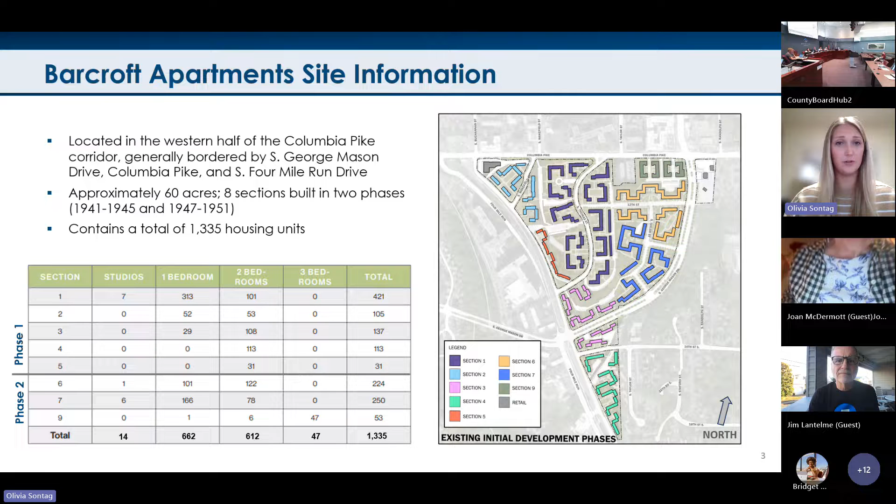So in 2021, Barcroft Apartments, the property was listed for sale and it risked the displacement of many residents. So with a loan from Arlington County and Amazon to Jair Lynch, they were able to acquire the property, and the affordability of those 1,335 units was preserved for 99 years, up to 60% AMI. No residents were displaced as a result of this acquisition.

Additionally, rents were frozen in 2022 for residents living at the property, and annual increases, which started in 2023, are capped at 3%, up to a maximum of 60% AMI. And then also as of December 2023, Jair Lynch and the county have agreed to meet some deeper affordability needs by committing to deliver at least 10% of those units as affordable to households earning up to 30% AMI.

So we had 2 primary objectives for this land use process following the December 2023 approval of the financing plan. The first was to build upon and update the vision of the Neighborhoods Area Plan from 2012, as well as the Columbia Pike Revitalization Plan, adopted in 2005. The goal of this is to support both the financing plan, but also incorporate some additional site analysis and information that's been provided by Jair Lynch over the past couple years.

And then a second objective of this process was to explore some existing and new tools to ensure the updated vision and commitments are clearly documented and can be successfully implemented as part of a phased strategy for this large site.

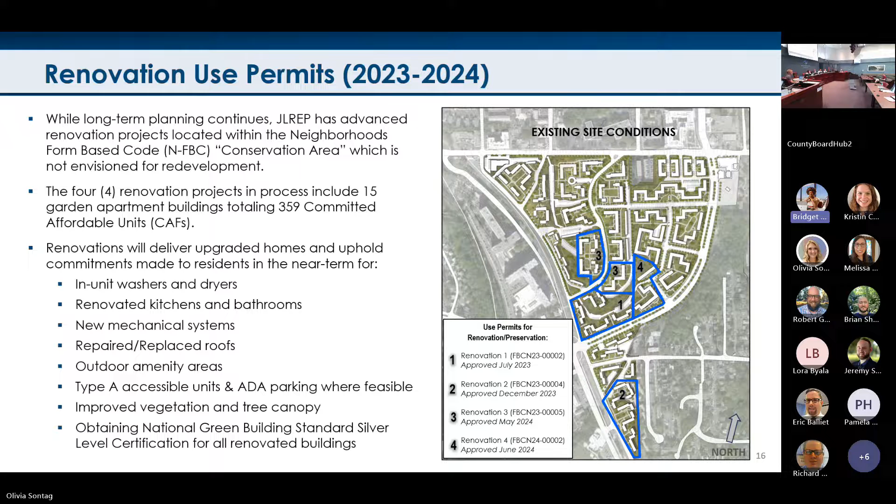Turning to the working group process we've been on over the past several months, Ms. Sontag gave a good outline of those various meetings starting at the beginning of this year. Our team has been quite pleased with that process. We've really enjoyed the dialogue and feedback we've gotten, and we feel we've been responsive to the working group's concerns and feedback, and that this plan reflects that vision.

So I'll go through relatively quickly some of the key elements of the redevelopment plan. This slide is meant to show what's informing the location of the redevelopment sites.

One main consideration is of course topography. If you've all been out to Barcroft, you'll note it's quite steep and hilly in some areas, especially on the southern end. That's a factor in determining where to locate redevelopment.

But the chief influence here is the neighborhood's form-based code conservation area. That area highlighted in yellow color in the center is the area intended for buildings to be preserved historically, as well as from a housing affordability perspective.

We've made a couple of changes to the existing form-based code recommendations. Those purple hatched areas to the left of South Thomas Street are areas where we're adding back in buildings that we think should be preserved to keep that historic Barcroft gateway intact.

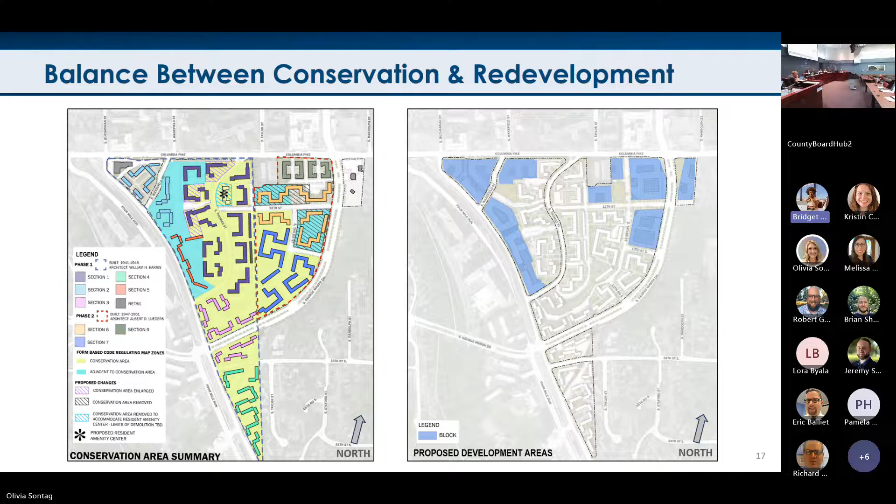You have the next slide. Here I'll hand it off to Mr. Pinkoski to walk you through some of the key elements of our transportation plan.

Internal to Barcroft, the MTP calls for 12th Road to be a bikeway, but we are going to be enhancing that through this process. West of Thomas Street, there is a trail connection proposed on a future road. What we've been able to do is work with staff to really create that east-west connection similar to the road grid, providing enhanced facilities along 12th Street and Wakefield, and a connection from Wakefield to the W&OD trail along Four Mile Run Drive, which was not currently contemplated in the MTP.

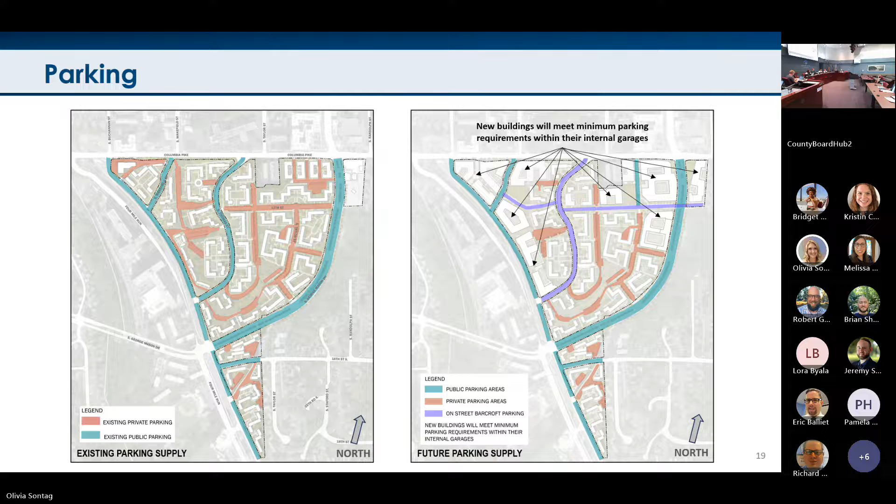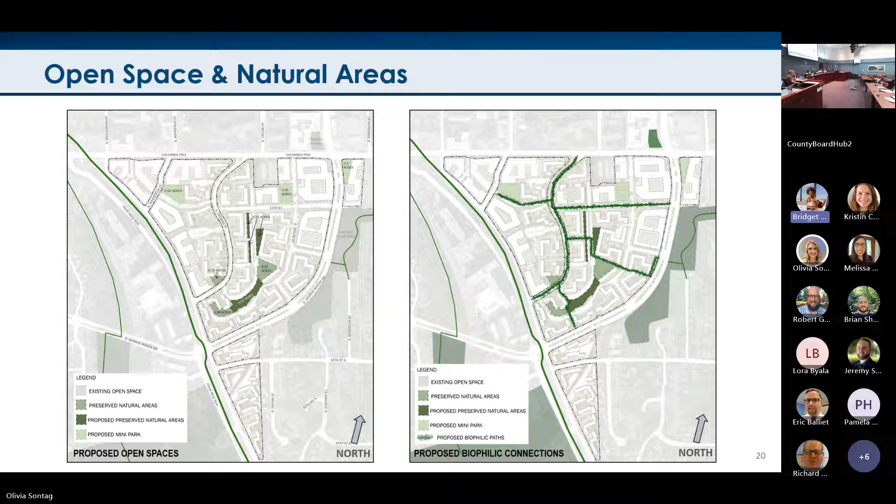On the right-hand side, you'll see our proposed biophilic path network. This will be pedestrian focused, where we're enhancing existing and proposed connections by providing additional plantings, understory trees, shrubbery, lighting, signage, and opportunities for benches and places to pause as you walk throughout Barcroft, to provide a unique connection for pedestrians and contribute to the placemaking we're trying to do here in Barcroft.

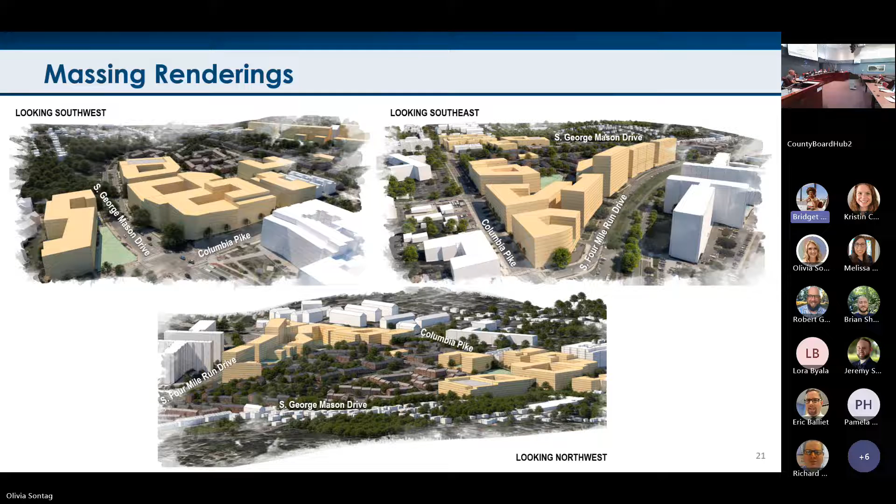Here's some illustrative massing renderings. We know it's quite difficult sometimes to imagine what the plan might look like with these 2D exhibits, so this is a very rough, high-level overview of what Barcroft might look like with the proposed vision implemented. With that, I'll hand it back to Mr. Matuzik, and our team is available for any questions afterward.

Thank you, Lauren. Good evening, everyone. Matt Matuzik with the Planning Division. I just wanted to walk you through several of the policy-related items we have, and explain how the process over the last few months involved a number of very specific plans that have been developed, particularly for the Columbia Pike corridor, including the Barcroft property.

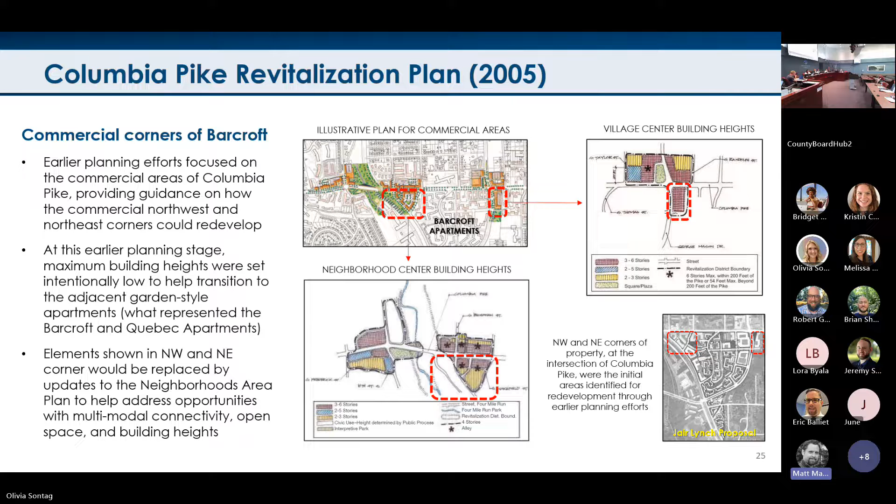So as we look at that neighborhoods area plan, this is the one we did in 2012, focusing on Columbia Pike's residential areas. Here's where we not only bring in those commercial corners, shown here in white because they don't have that same guidance in the adopted vision, but we will complete that entire block and also return to the previous vision of what type of land use we're expecting, the maximum building heights, and the other elements that became the building blocks for our form-based code zoning tool, speaking to the transportation network and the open space network. So primarily map changes, but with some additional narrative to explain this year's land use process.

So just zooming in a little bit further, you can see on the next slide that one of those elements really begins to address...

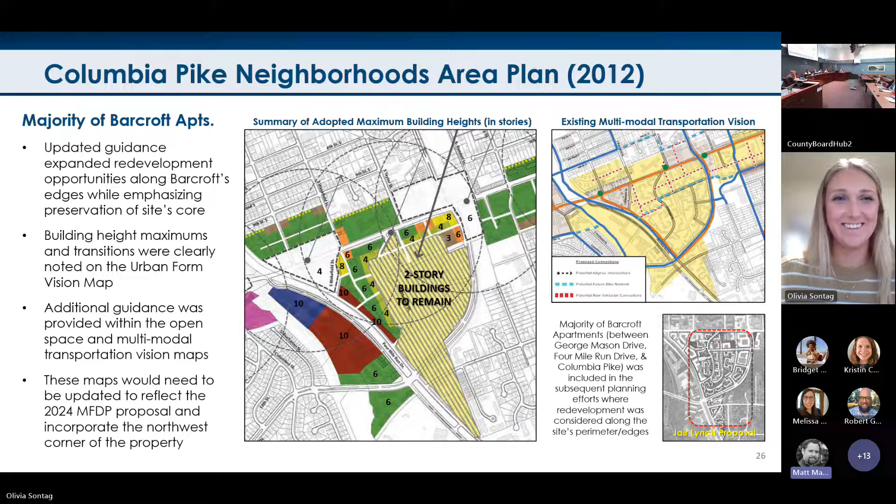And Matt, I think Kristen's going to jump in here for the next couple of slides, if that's okay. Sure, we'll give you a break. Thank you.

So one of the things we recognize is that both the neighborhoods plan and subsequent planning documents in the MTP no longer reflect the vision we now have for Barcroft. On these maps you can see the changes happening with the network. Jair Lynch didn't really speak to it, but there was a by-right development that happened just off of Columbia Pike that makes the 11th Street connection we had anticipated—being that east-west spine for Barcroft—no longer implementable.

So we've recognized that 12th really does need to do that east-west connectivity. You can see that highlighted in the blue dash here. We've also recognized that Wakefield needs better bike connectivity to connect everyone along the Columbia Pike corridor parallel to 12th, all the way down to 4 Mile Run, across South 4 Mile Run Minor.

And we want to make sure those are safe. All of the bike facilities identified will be designed based on the guidance in Appendix C of the bike element, so that they provide safe and comfortable facilities for our users. So this is how you can see the network has evolved.

If you want to move on to the next few slides, we'll see how that's reflected in the maps. So on this map, you can see that a number of planned connections are no longer going to be part of the vision for Barcroft moving forward. We're just making sure the MTP guidance is something that's usable for us moving forward.

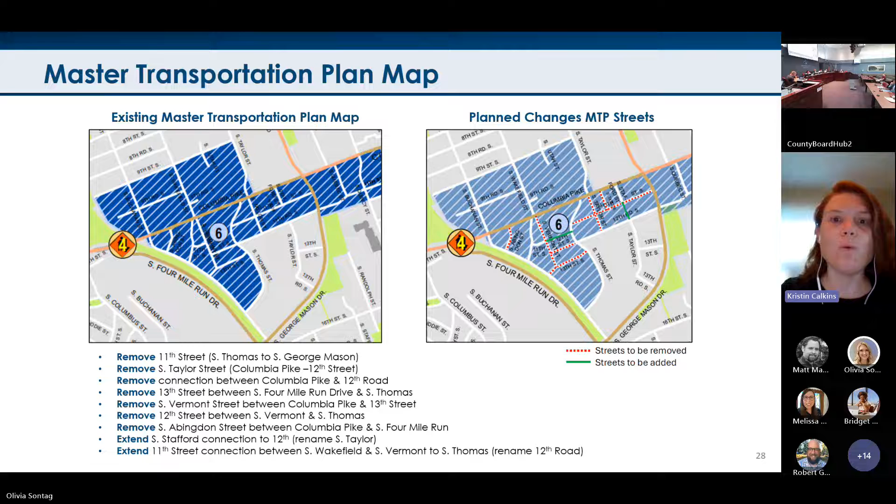12th will become elevated. In the original plan, it was envisioned much more as a bike boulevard. Now we know it's going to have to accommodate a lot of modes and be a true multimodal street. And where we've lost one South Taylor connection because of the construction of that townhouse development, we've created a new South Taylor connection between 12th and 11th to make sure we have a bit more circulation capacity within Barcroft.

So we've changed it from an on-street route to a planned bike facility as part of this change. We've also recognized that we really need to catch the grade from South Thomas to South Wakefield, and that the connection we'd planned before would be difficult for a lot of users. So we're going to continue the 12th bike facility to South Wakefield and create some sort of safe, comfortable facility on South 4 Mile Run Drive to connect to the W&OD.

And that, I believe, ends the transportation slides. All right, thank you, Kristen.

The other elements shown in the earlier slide also capture how some of those layers just discussed carry over into our general land use plan. Here's the existing and future street network in the white lines that would need to be updated. Right now we're looking at the existing GLUP map. In a second, we'll show you what the proposed looks like. But a number of other elements reflected here also need to be reconciled.

What this map is capturing is really the relationship between those two planning areas, the commercial one from the early 2000s and the neighborhoods one from the 2010s. So the commercial area is identified by note number 8 on the GLUP, and you can see its dashed boundaries there. 24 is the later note identified with the neighborhoods area plan and its revitalization district. And 24A is simply an even more fine-grained boundary for the conservation area, so the limits of preservation versus redevelopment.

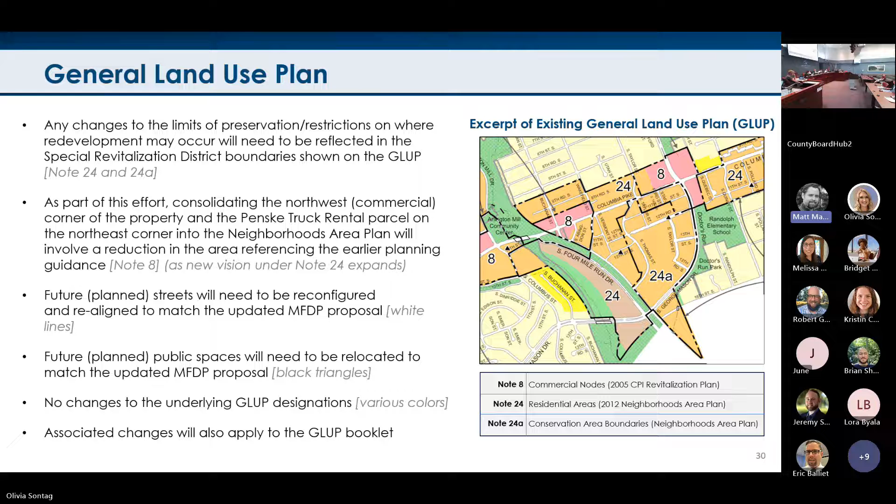In the next slide, you can see how that information has been updated. The boundaries for note number 8 have been reduced. We now have 3 black triangles because we've gained an extra park at George Mason, and the different line weights have been adjusted to reflect what you're seeing in the other maps, including the MTP.

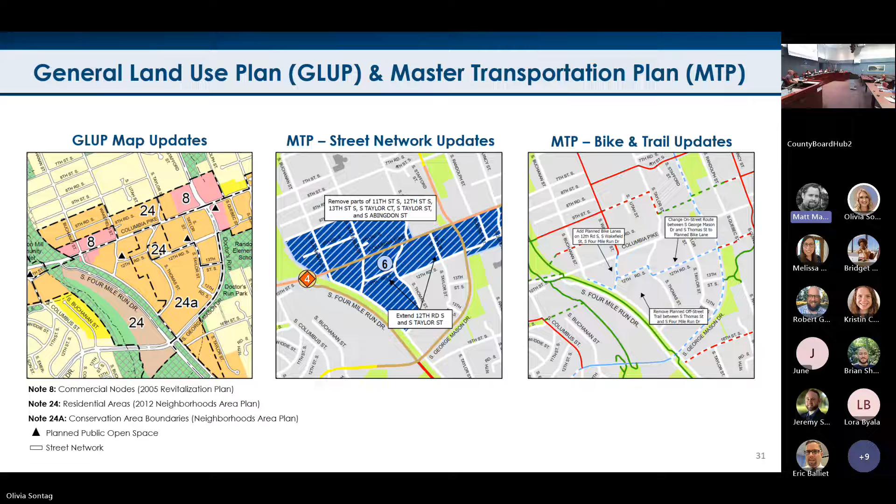We are also going to use this opportunity to update the GLUP booklet, which is kind of a companion document. We try to update it once or twice a year. And here, I think some additional narrative about this year's process and where we are ending up will be reflected as well, to make sure that no matter where you go, you can see this information pretty clearly.

All right, and then the next and final section we wanted to cover is really what's still ahead of us, which unfortunately is a lot of work, but it really involves a more detailed dive into the concepts we just finished discussing. So now that we have a general sense of where the parks and streets are going to be, we now have to figure out their character, their cross sections, and the relationship with the buildings, and ultimately get down to the level of detail that already exists in each of the form-based codes.

So creating and establishing build-to lines and making sure that we have enough detail available so that when these new construction applications come in, we can review them against this new guidance. This is something we're anticipating to complete in the fall and come back for further review in the later part of this year and through the winter.

And as we do that, at that point we'll be finalizing the GLUP and MTP changes that we just talked about. They are only being advertised in July. And at that point, we also anticipate probably being ready to consider the first new construction use permit for the property, which would be slightly different from the 4 renovation use permits we've looked at to date.

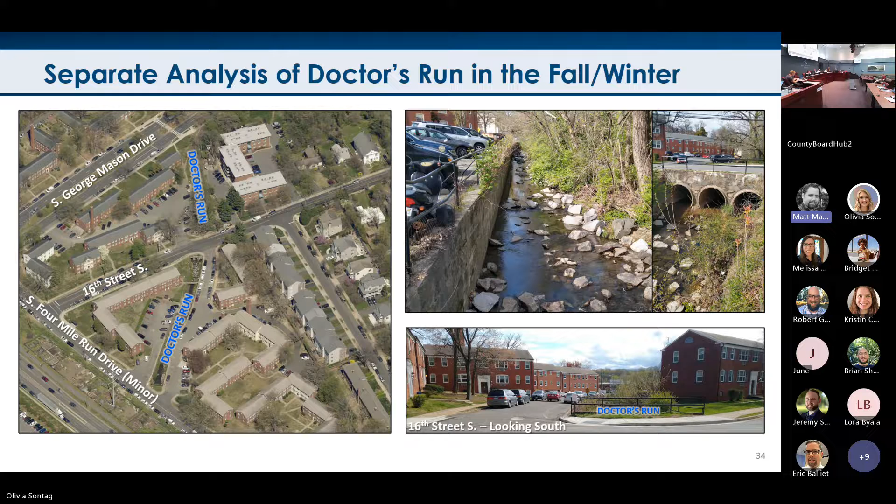One thing that's not emphasized enough on this slide is another piece of work that will occupy a good chunk of the rest of this year, and that is our ongoing analysis of Doctor's Run. This is the stream located along George Mason Drive, but it particularly begins to cross through the southern portion of the property. Given how close the surface parking lots and existing units are to that stream, we really need to do a further examination of the modeling used to verify flood risk and mitigation opportunities, further study the sustainability of that area, and also look at some biophilic opportunities that might exist along the way.

So while we've been able to resolve a lot of vision elements through the first 6 months of the year, we do anticipate that this item will really warrant a separate study that also is going to happen in parallel with the other form-based code updates we identified earlier.

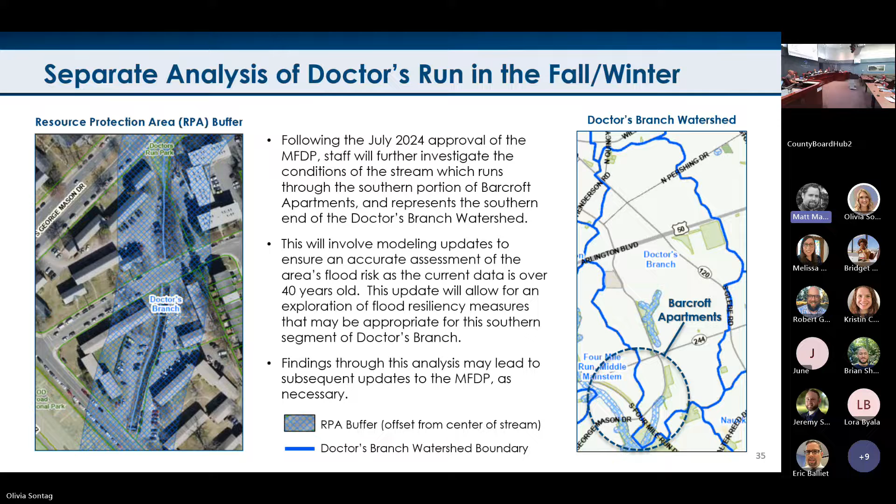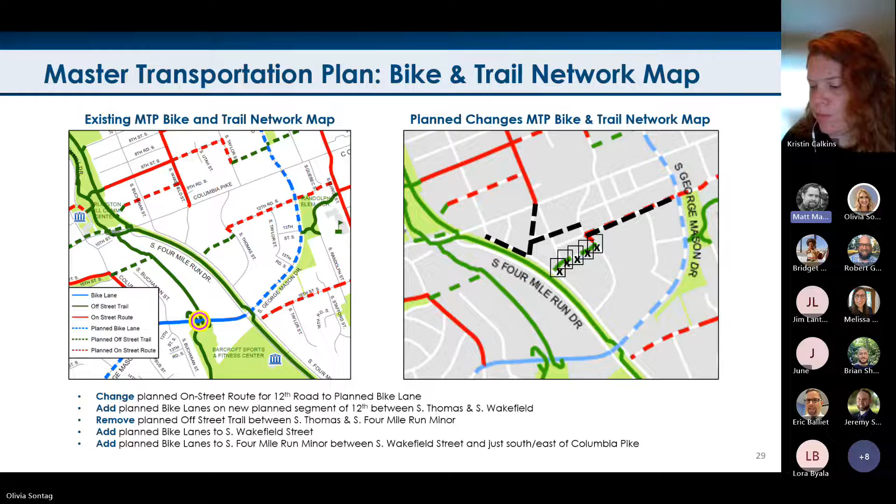Okay, it is. I can briefly speak to it in that most of those designations were identified as guidance for when future redevelopment would occur. Typically what we would do is wait for that opportunity to engage the owner in review of their potential redevelopment application, and consider exactly what the alignment looks like, the nature and cross section of that connection. So that's more of an expectation that private development would be involved in delivering.

Understood, thank you so much. And I think I know which apartment building that would involve—so that answered my question. Thank you.

I want to say I've been the TC rep for this land use process. It's been a great process—I really commend the Jair Lynch partners and all the staff. They've been doing a bang-up job on what's a really great opportunity, and a fantastic thing that our elected officials have done in saving a dramatic amount of affordable housing in Arlington on Columbia Pike. I'm pretty happy with where we've landed, except for one thing, which remains my main concern.

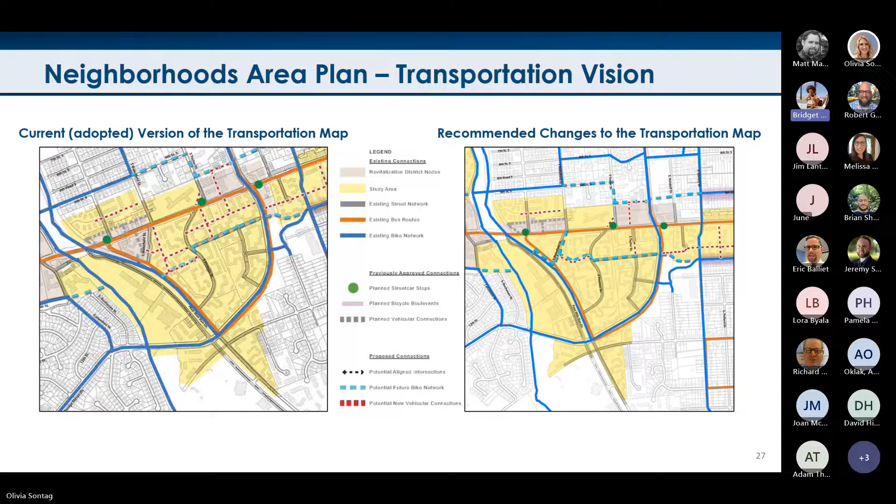That concern is 4 Mile Run Drive Minor. One of the big changes, in my opinion, of the Jair Lynch vision versus what was in the original form-based code vision, is there's a fair amount of new development planned for 4 Mile Run Drive Minor, all the way from Thomas up to Columbia Pike, whereas it used to be concentrated in that top left corner.

I like that we've added this bike facility of some sort on 4 Mile Run Drive Minor between Wakefield and wherever it can connect to the W&OD. I just feel like we need that facility for possibly the whole length of 4 Mile Run Drive Minor, or at least from Thomas all the way up to the W&OD or to Columbia Pike. Those are pretty sizable buildings that hopefully will hold a whole bunch of new neighbors.

I would really like those new neighbors to be able to get from their building safely to the W&OD. And while the W&OD is right there, it is unfortunately like 10 to 20 feet below where those buildings are going to be. The grade there is very steep, and it's hard to connect down there.

Ms. Calkins, can you talk at all about staff conversations about whether more bike facilities would be appropriate on 4 Mile Run Drive Minor to accommodate these buildings and the Barcroft development?

We have talked about this, to an extent, with Jair Lynch as well, because everything also comes out of their development site when we're asking for these connections. South 4 Mile Run Minor in front of their property will also be rebuilt.

One of the things staff has talked about is that there's going to be a wide sidewalk now, based on the form-based code, when cross sections are created in the next half of the year. That sidewalk will be wide enough for the handful of buildings that exist there, so people will be comfortably able to maneuver on those sidewalks if they're uncomfortable on South 4 Mile Run Minor, to make it to the more network-based facilities. We're really trying to focus on making sure that the network is served well.

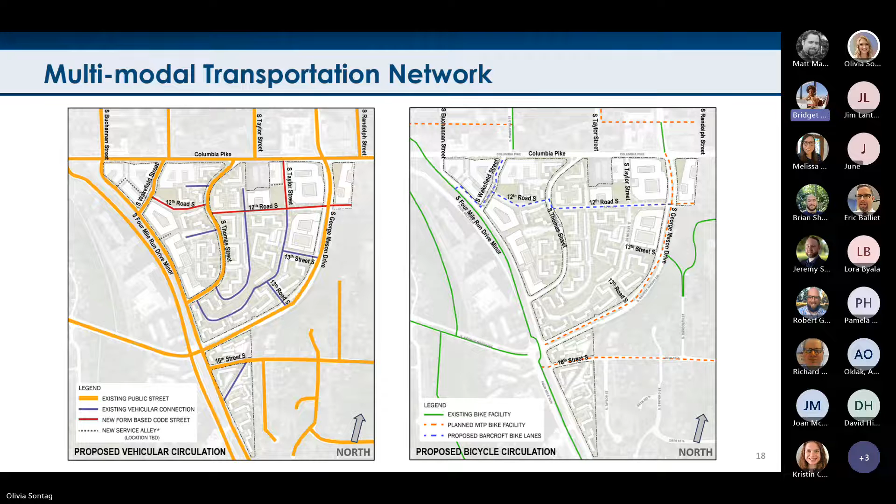All right, so just to be clear on the timeline, what's going before the board in July is what is here before us now, which is the MTP update, the financing and development plan update, and the very broad updates to the neighborhoods plan and the 2005 revitalization plan. Is that correct? Yeah, I think yes, that's correct.

Specifically - oh, sorry, go ahead Matt. I was going to ask to maybe bring up that last slide with the two primary actions that we wanted to emphasize. There we go.

It will be over the second half of the year that we'll get down into the detailed updates to the form-based code. Yes, second half of the year, we'll be looking at amendments to the form-based codes for those cross sections and other items. Fantastic, alright.

I look forward to talking about the cross section for 12th Road South, which I imagine we will be writing into the form-based code. Commissioner Flores, go ahead. A point of request: as we do that, if we could have maps of topography to gain visual understanding of how the hills affect the roads and transit, that would be incredibly helpful. We are all across Arlington pretty hilly, and this area in particular, I think it would be really helpful to get visualization on those hills as we look at maps like that.

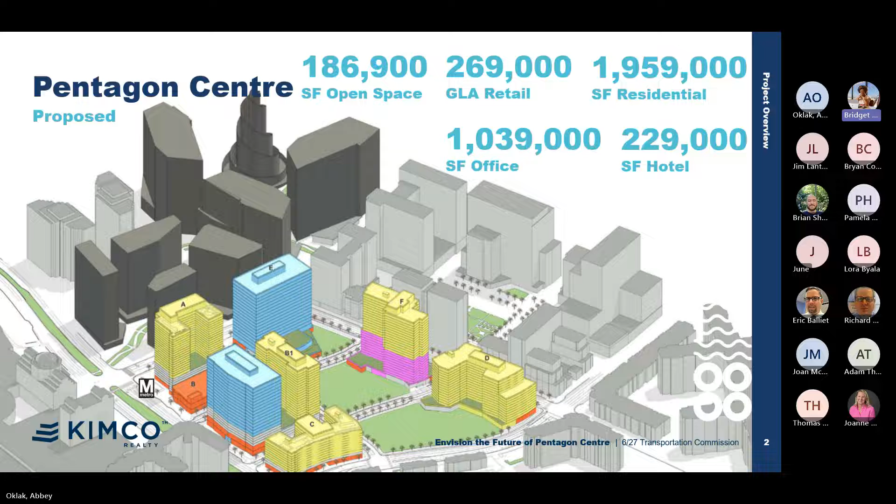From our original approvals and the updates in 2015, that was all pre-Amazon, which you can see in the upper right-hand corner, obviously with the helix in dark gray. So we're looking to match the density surrounding the site versus what's on the site today and what's currently approved. This is the big overall picture of everything we're proposing, with about a 30% increase in open space, and the increase in density and residential on the site is the majority of the increase.

Everything else is staying basically the same. However, the locations of the streets have changed to accommodate new block footprints, as well as to accommodate the phasing option to leave the Costco in phase one. So the north-south street, which we're calling Grant Street, moved to the west in order to allow Costco to stay in an interim phase one. So really the overall picture is relatively the same. However, we are adding the sector plan requirements to the right.

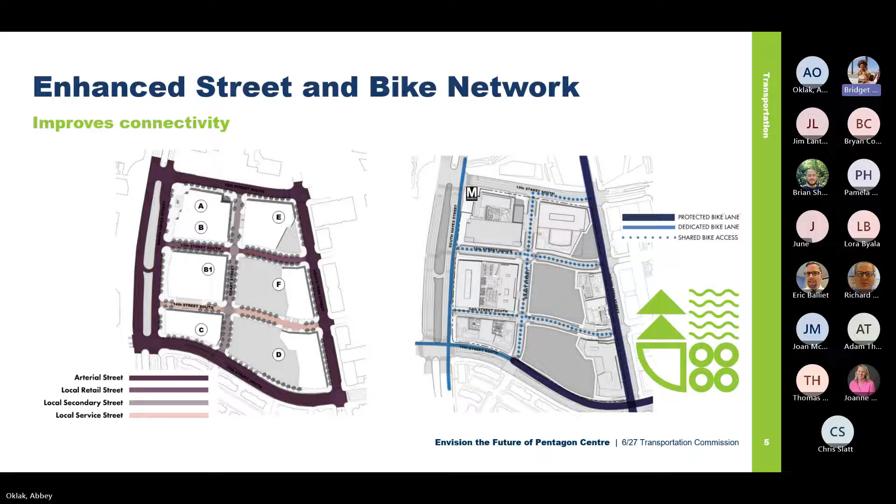Here's a little bit more detail. We are adding about one-third of a mile of new protected bike lanes, and we do anticipate slow traffic on the internal streets for shared connectivity throughout the site. Please note there is limited bike connectivity on 12th Street because 12th Street is the future bus BRT way, and there's a bus stop in that area, so there'll probably be limited activity that way.

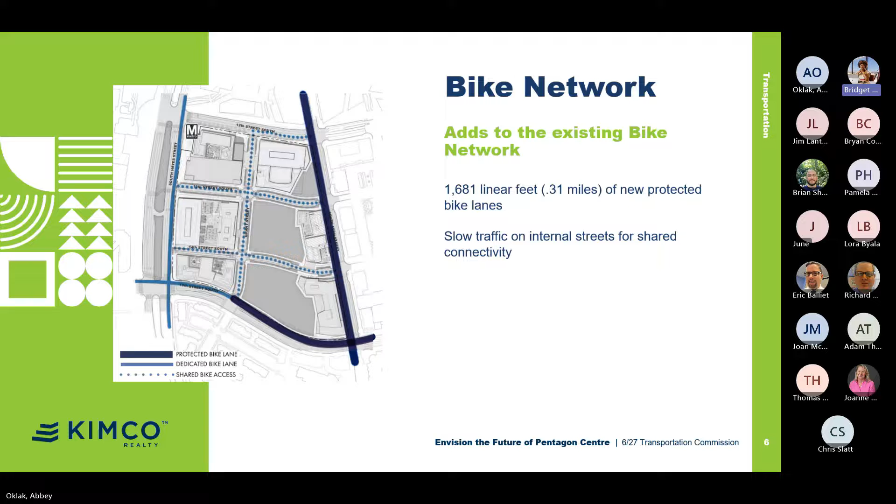Mike is also on our team, so I'm going to pass to Mike, who is our traffic engineer, to talk a little bit more about additional details that will be changing on the streets, as well as the overall traffic assessment on the site.

Hello again, everyone. So as Abbey mentioned, we're sticking with the same grid that was previously contemplated and enhancing some areas of that and creating these 6 smaller blocks. The focus of 13th will be a retail corridor where there's outdoor dining and pedestrian activity prioritized, especially along the park.

West of the park, west of Grant Street, we have some slides later about implementing the green ribbon element along that segment. 14th Street, the southern east-west connection, especially to the west, will really be service-oriented and provide access to the buildings on each of the 4 blocks.

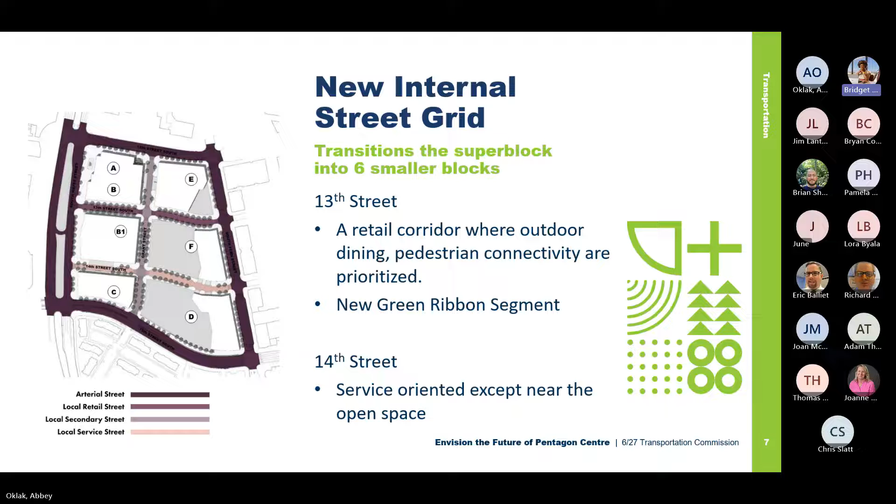Going to the next slide, Grant Street is the main north-south connection that will be provided, and we have some slides coming up that show the sections, but Grant will also be a fire access route for emergency services.

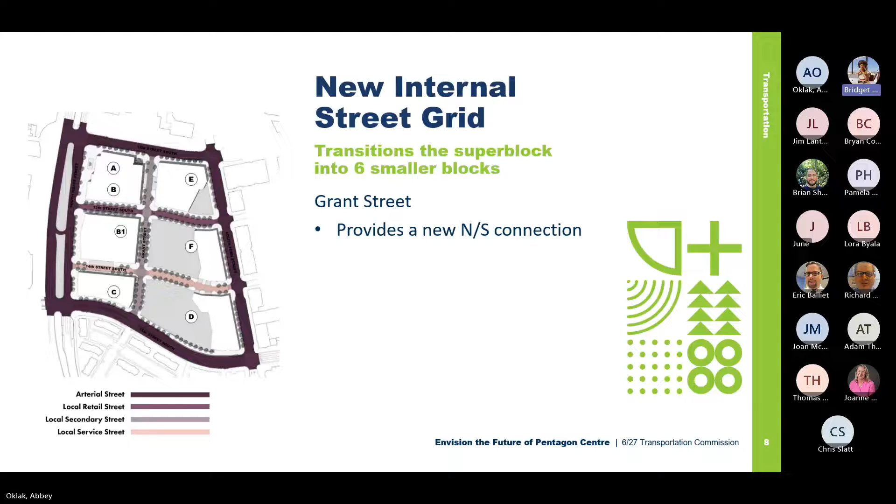I won't get into too much of the details on the sections, just hitting some of the highlights. Again, this will be a new street with outdoor dining opportunities. So the section on the top is what was contemplated in 2015, and the 2024 section proposed is on the bottom. You can see on both sides, we are increasing the building zones from 2 to 20 feet with varying

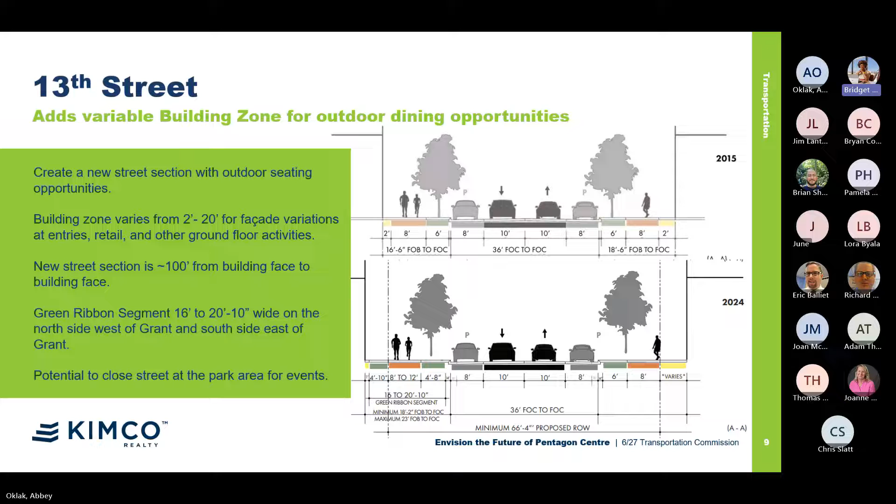facades to allow for entries and retail activity at the ground floor. Generally speaking, the building facades from face to face and the streetscape with the road will be about 100 feet from building to building. And again, the green ribbon design will be implemented along this stretch of the road. What will also be an opportunity here is to close portions of it for events and to connect the 2 parks north-south.

As I mentioned, looking at Grant, if you look at the 2024 section on the bottom, due to fire access requirements, we've increased the street width to the 26 feet required for fire. They probably won't be 13-foot travel lanes each. There'll probably be some kind of buffer created in the middle so that vehicles still maintain that slow move through

the 6 blocks here. We're looking to maximize the streetscapes, again trying to provide that varying facades and introduce ground floor retail opportunities where we can, but we are limited to 30 feet from the face of the travel lane to the face of the building so that we can meet fire access.

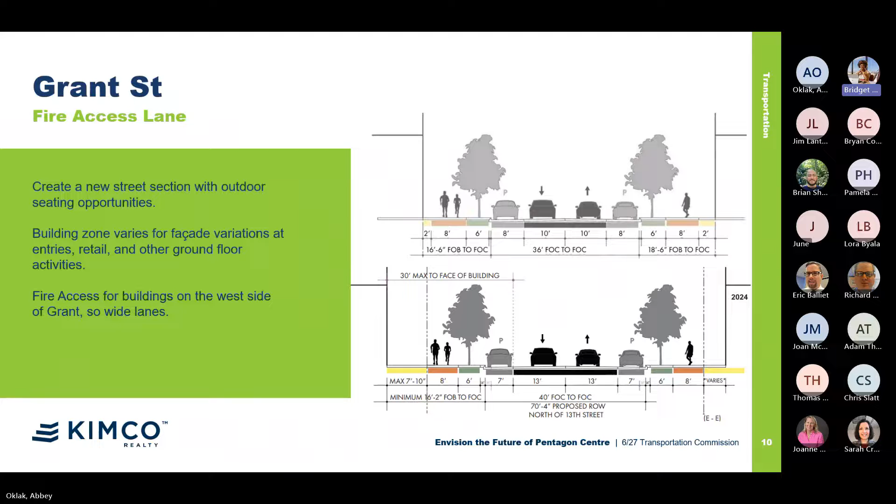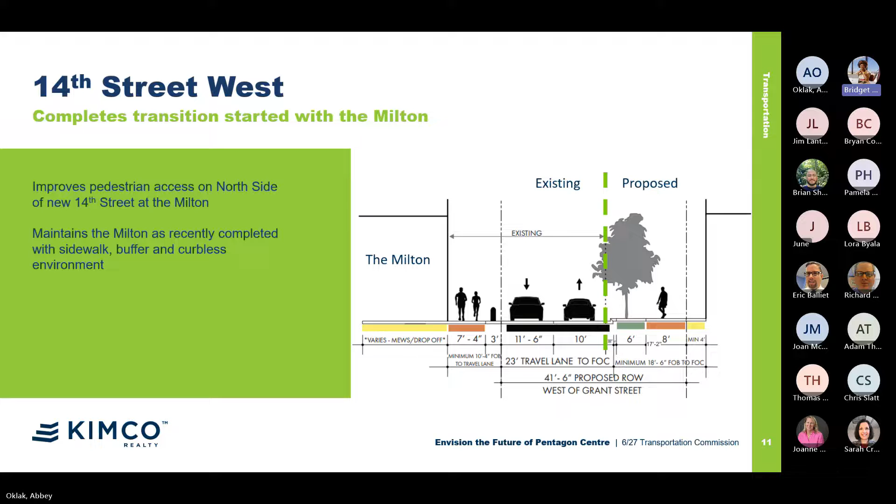14th Street is partially constructed today with the Milton. It will be improved on the north side within the Milton block and maintain the southern side that has been constructed with the Milton today. That includes the sidewalk with a curbless environment.

As we mentioned earlier, we will be adding enhanced bicycle facilities that match what was done with the sector plan update, most notably Fern Street.

One move that we have made from the previous plan that Abbey didn't mention was we've shifted the buildings from facing on Grant Street to the east so that they're on Fern Street to create a double-sided retail street and really bring that open space through the middle of the site.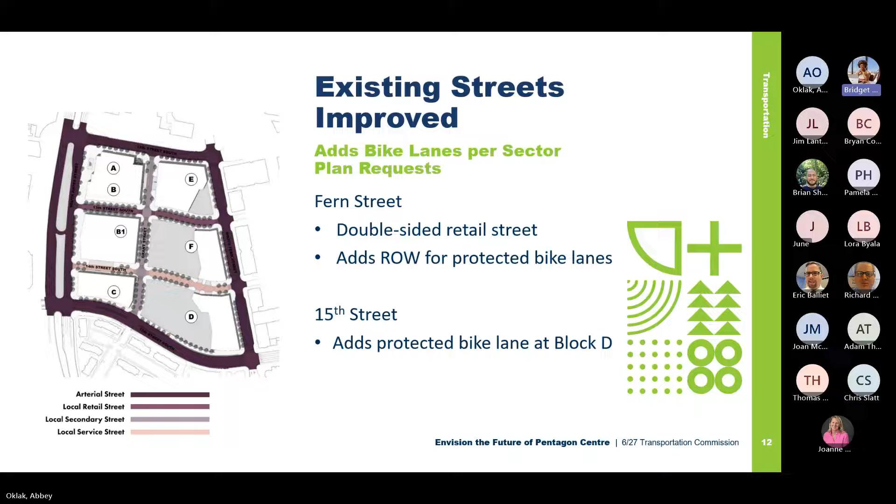And with that, we've created protected bike lanes from 12th Street down to 15th Street. Where possible, we're actually introducing protected intersection design as well along our frontage. 15th Street along the D block, we will be implementing protected bike lanes there as well. Today, they're just regular on-road facilities with some parking.

And also, as I mentioned, we will have the protected intersections where we can implement them. Specifically, one that we've targeted is 15th and South Fern.

To start, there are opportunities also to potentially introduce bike lanes with the first phase of a development, which is actually happening on the west side, the opposite side of the Costco. It would come at the expense of either the center turn lane or some on-street parking, but there is an opportunity there.

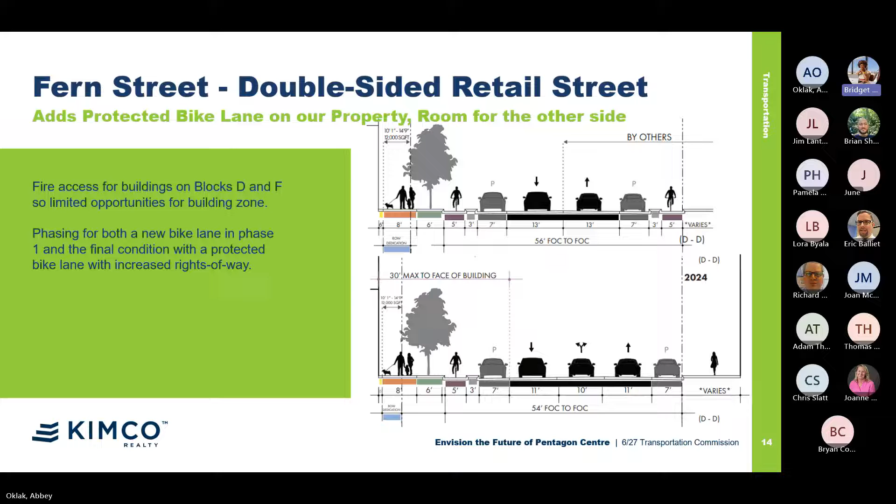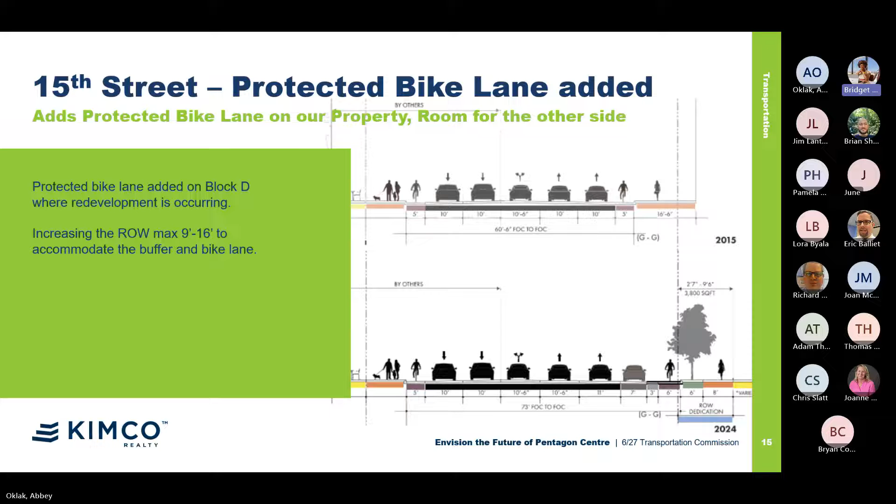And here's just a look of what 15th Street will be in the future, where we have the protected facility and parking will extend the whole block, where today it's only a portion of the block.

We did do an MMTA update as well on this. Obviously the site is well served by the metro system. We have the surrounding grid around us. The metro is literally at our front door here.

When we looked at the analysis, it was interesting that the Costco development actually generates more traffic than the whole east side of the proposal. So when we remove the Costco, the operations of Fern Street would improve with these buildings over having the Costco there.

We will be implementing a transportation demand management program with each phase of the development. And then there is a potential that the intersections along South Fern at 13th and 14th could be signalized in the future, pending warrant analysis.

This is just a snapshot of what phase one development trips would look like. 52 a.m. peak hour trips, 86 p.m. peak hour trips, 76 a.m. transit users, 346 p.m. transit users, and then some active walk and bike trips of 40 a.m. and 108 p.m. And then here's the numbers that obviously increase with phase two, but you can see the reliance on transit and active trips are significant.

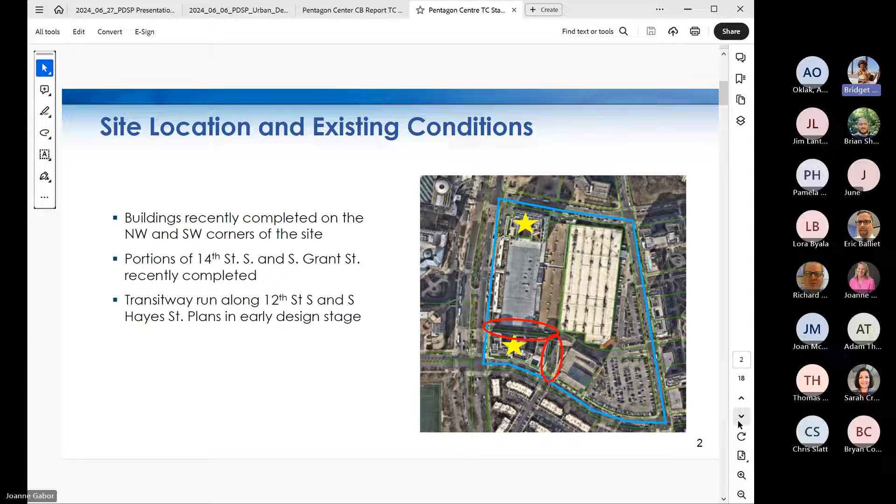The location is where Costco is today. We have existing buildings in the northwest and southwest corners, and portions of streets completed, that's 14th Street and South Grant Street. The transitway will run along 12th Street and Hayes Street, and those plans are in the early design phase, at about 30% plans. That will need to be incorporated as we finish this area to make sure those plans work in the interim and ultimate condition, in addition to what's proposed in this block.

This is an overview of the changes. While the applicant did focus on transportation, suffice it to say there are a lot of changes between use, height increasing, height decreasing, and GFA. The plan is being seen by planning commission next week, so if you want to learn more, please come to planning commission and they will be happy to answer all your questions about density and GFA.

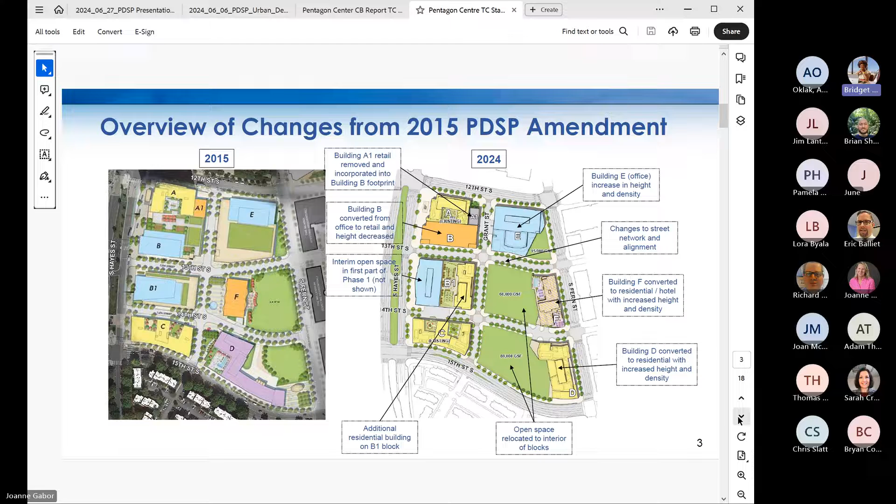This shows quickly that we are having about an increase of 30% in GFA across the site. We do have an open space calculation here, but we do not have the calculation of what was shown before, so we don't have that comparison here.

There is going to be some internal right-of-way dedication. As I was listening to the discussion about Barcroft, if that is dedicated or private streets with public easements, we'll figure that out during final site plan. That open space will now be interior to the site. We have that green ribbon pathway, the entirety of 13th, 14th, and Grant will be completed when this is all finished, and we will have that southbound separated bike facility on South Fern Street. We will be accommodating and coordinating the transportation improvements for the transitway, and any other future improvements that the county goes forward with as this project moves forward.

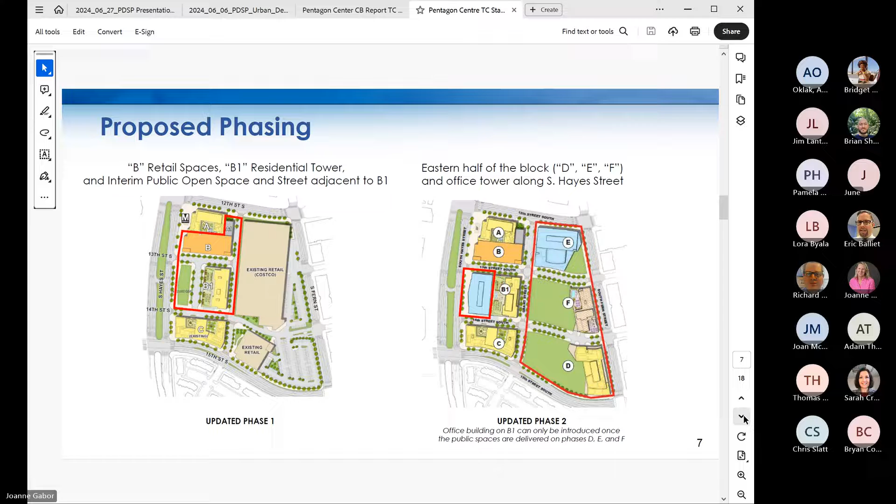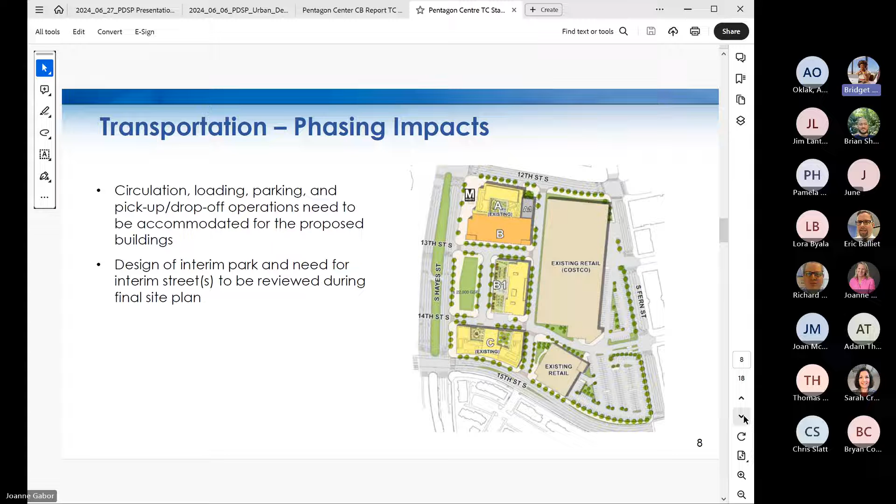One thing we will have to think about as we do the phasing of this - right now we're looking at 2 phases, potentially more as the applicant wants to move forward - is making sure we have all the circulation, loading, parking, pickup and drop off operations, fire access, and all those movements accommodated for each phase. So it could turn out you have to build more than just your street frontage to make sure we do that circulation to and through the sites. The same for that interim park area - we want to make sure what's designed makes sense whether the interim is 6 months, 6 years, or a longer period of time.

The street network - as the applicant went through, we did some preliminary discussions. All these street sections will be looked at closer during final design, and we'll get down to the nitty-gritty of what those are. Generally speaking, we will be completing Grant Street north-south from 12th to 15th, and then 13th and 14th streets, which will align with 13th and 14th at Fern Street. The exact location of 14th exists today, so that's already finished. 13th Street at Hayes is the one we'll be trying to finalize during the site plan for that first phase, most likely.

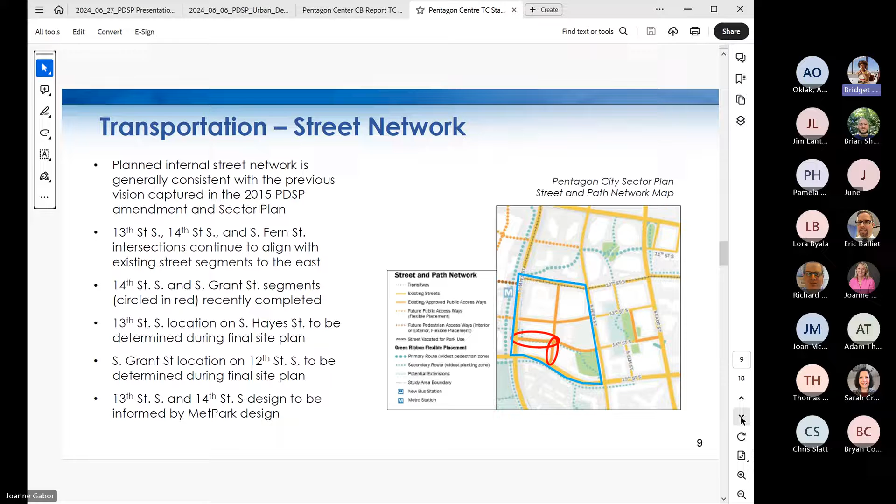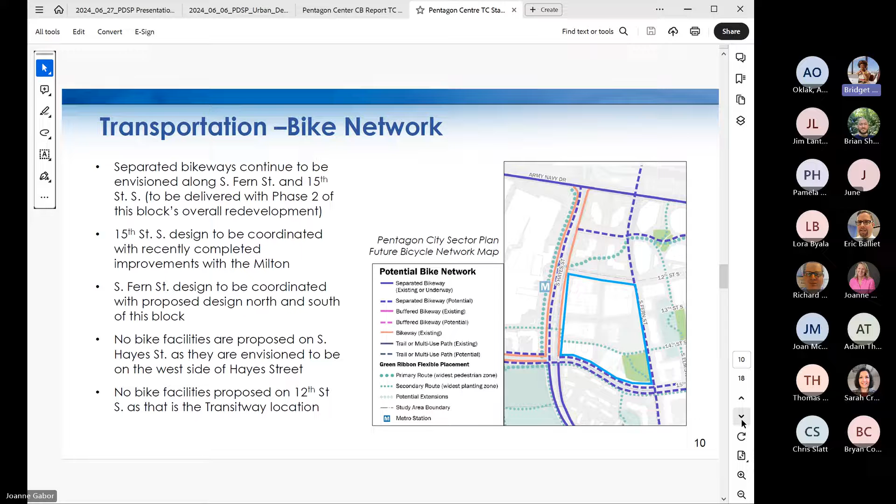The bike network - again, these are from the sector plan. While this site is not in the sector plan, Fern Street, 15th, Hayes, and 12th Street are within the sector plan. So you do see separated bike facilities on Fern Street, which the applicant is proposing, and also on 15th Street. No bike facilities are proposed on 12th Street because it is the Transitway. Hayes Street would have it on the west side, the mall side, so that would not be included with this proposal either.

This is a lot of small text that talks about what is in the sector plan. I'm not going to read it all to you, but suffice it to say, this is again what we're looking at. We have guidance about Fern Street and 15th Street that we will be utilizing to make sure it aligns with sections north, south, east, and west of this site, and is compatible with MetPark and the future we are looking for.

The green ribbon - in the sector plan, as you can see, it's just shown on 14th Street, basically connecting with the existing crossing at Hayes Street and MetPark, as the applicant has shown, and staff is generally supportive. It looks like 13th Street makes the most sense. Within this block, the crossing of Hayes Street still will need to be worked out, depending on the timing of redevelopment and where we are with Hayes Street.

That will greatly influence what happens. Additionally, you saw with the applicant, they are showing this sort of northeast running, also green ribbon area. I don't think it's intended to be a path specifically, but more of an open space that people will be able to utilize.

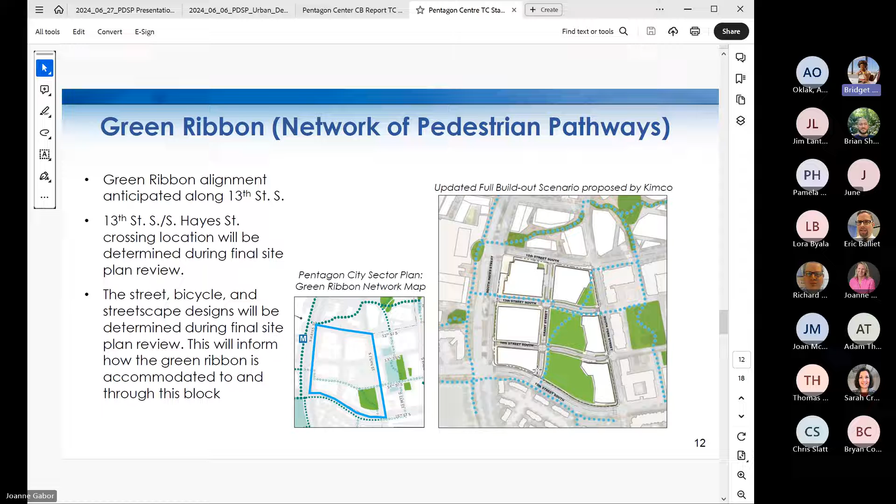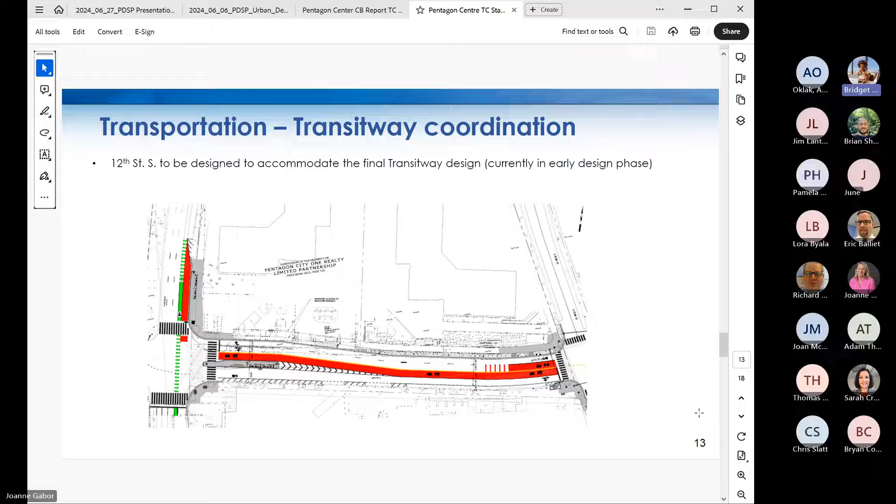This is just to remind everybody, this is what we're looking for with the transitway. It doesn't have a lot of impacts in reality to this site - it's more the site to the north. But we will be utilizing this to make sure we can realize the interim and the ultimate design, and it will influence what that 12th Street frontage looks like when the Costco portion does redevelop. It will also influence Grant Street and how Grant Street interacts with 12th Street.

The public review process - we did 2 LRPC meetings. We were sitting here in July, technically June, but we will be going to the July County Board meeting. Then the developer will have to submit those final site plans for each phase for public review, and we will have our traditional SPRC meetings and staff review, where we'll get down to that nitty-gritty of what's happening. We are at TC tonight, and we are going to PC July 11.

Then the county board is July 22 - it is a Monday night. If you haven't heard, it has been changed from the traditional Saturday. And with that, staff supports the project and recommends approval with the attached conditions. If you have any questions, I am happy to answer them.

Thank you very much. Before we get going too far, can somebody give one more time a brief overview of what's in phase 1, what's in phase 2, and how long we might be looking at before phase 2 comes around?

Yes, I'm happy to give a little bit of background information. Let me share my screen again.

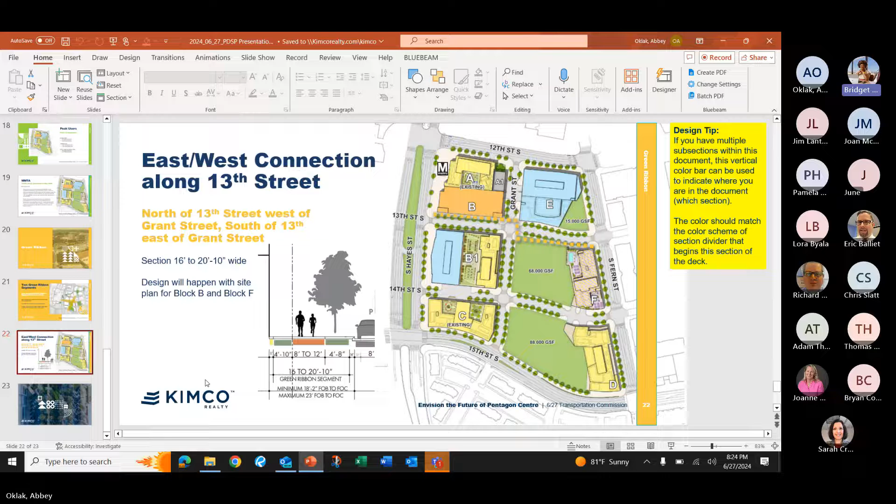I think the best way to look at it is this overall plan. I'll go full screen to make it as big as possible.

Phase 1 is anticipated to be the west side of Grant Street, thinking of Grant Street as the north-south divider. However, because all the open space is in phase 2, the east side, where Costco is today, we are proposing that this office building not be built until phase 2.

There's an interim open space in phase 1. The phase 1 line is basically block B1, B, and A1, and then all of Grant Street north-south, connecting to 12th. However, the office would not be there in phase 1.

Phase 2 would come and build blocks D, E, and F, and the open space, plus the office tower on B1. The condition is that once an equivalent open space is open and active in the phase 2 portion, we can start construction on an office tower.

At this point in time, we don't have timing on any of this. We're working internally on our own, and construction on phase 1 would start at the earliest 5 years from now. Given that, you have design and construction—probably a 36-month construction process, so 3 years plus design.

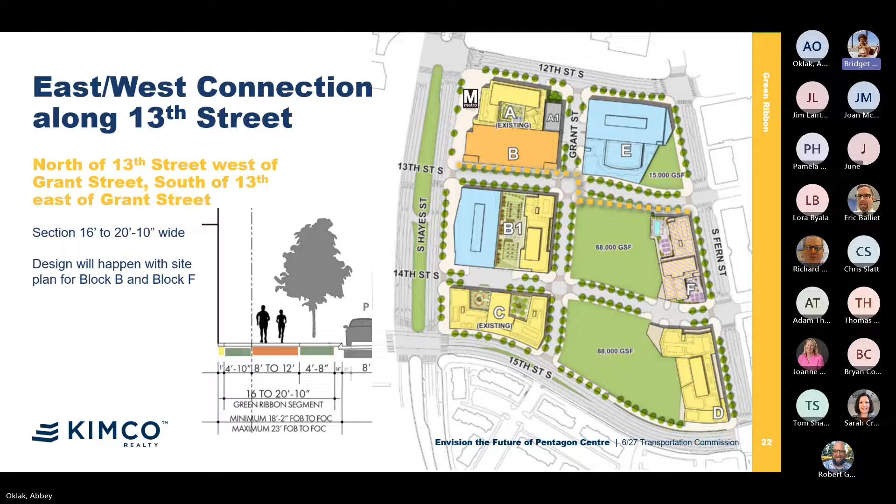One, you mentioned that you have an expectation that 64% of the trips would be transit and 9% active, and I think you said that's based on similar buildings. I'm curious, is that from observations or estimates of what you think will happen? Do you have other buildings that are very similarly situated where you've studied that in depth? It's estimates at this point. We did that in coordination with DES staff and other studies done in the area with consistent non-auto assumptions. So we have other DES studies that have validated through observations or data - that's kind of the level. Okay, that's great, that's fantastic.

Just another comment on the green ribbon - as somebody who is a bicyclist periodically on Arlington's system, especially the on-street system, I commend the fact that there will be a bicycle facility woven into the green ribbon, because the best bike lane is a bike lane that's not on a road, that's away from a road, that's separate. So from my perspective, this could just be a preference, but if resources could be concentrated on making the green ribbon bike trail more usable, more fluid, even wider, in lieu of having bike lanes on every street, I think that's a sensible perspective, as long as it had good connectivity.

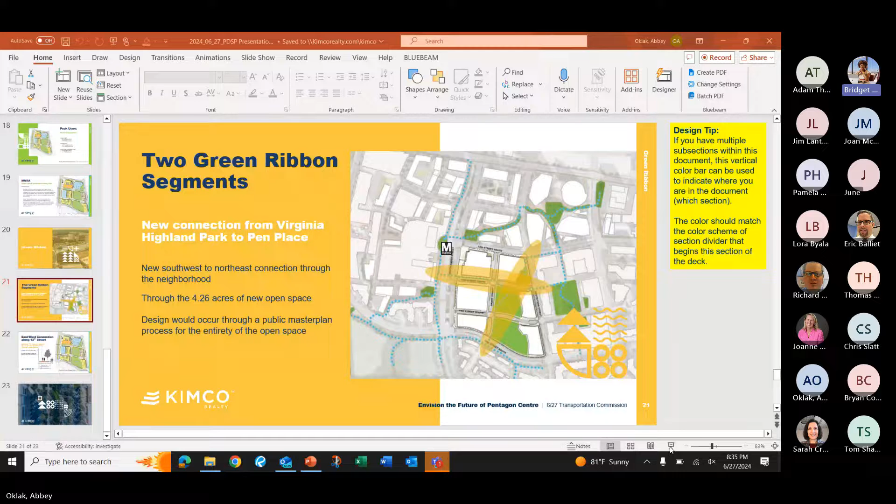So the issue with having it on 14th Street currently is that all of our service for the existing Milton and future B1 buildings is anticipated to be on 14th Street. So there are many curb cuts for loading, parking entrances, and whatnot there. So there would be a lot of conflicts to have the path going that way.

And then the same would happen for blocks D and E here, so you have all of the curb cuts. So really the thought was that while through the park you wouldn't have the conflict, there would be too many curb cuts to have a nice east-west connection.

And so that's why we suggested the 13th Street connection here. Overall, the goal would be that hopefully there'd be a way to connect to the park that would work, even though it wasn't really anticipated in the design of the MetPark at the front. Unfortunately, the way our blocks are oriented, that's the best location for service for those buildings.

Okay. And then, to echo my fellow commissioners, isolating a safe bike path journey for individuals traversing through this area is incredibly important. The green ribbon, as you know, is established to serve both pedestrians and bicyclists.

And I would encourage looking at the paths of travel between those two different transit users, because I think there might be space to almost divide and conquer -- have a path towards the open green space for pedestrian users or bicyclists if they're going there, but also have the green ribbon extend on the other side of the road to allow for safe bicycle transit.

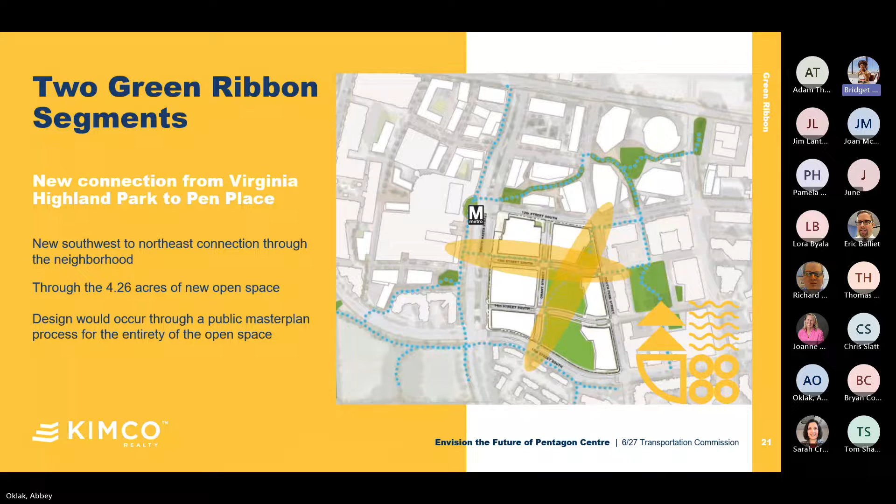All the streets are going to have on-street parking, and where we can implement, we'd like curb extensions at the intersections. We do have to accommodate larger trucks, so those will be evaluated at that time. Both internal intersections are envisioned to be four-way stops, so the shorter blocks, having the friction of the parking, should induce lower speeds.

Any plans for speed humps or things directly influencing speeds between blocks for vehicles? Not at this time.

We have talked about elevated crosswalks. However, we're so early that we're nowhere near it, but that is something that, especially through the blocks around the park, we'll need to look at what that looks like. Those intersections are probably going to be different, so maybe there's chicanes, maybe we do something interesting around the park to really make sure it's obvious that's a people place first, not a vehicle place first. At this point we're leaving flexibility for that to be designed in the future by leaving the space for it, giving room for parallel parking, which really does slow down traffic, especially on these blocks that don't fully connect through to Hayes. So it's not that we're creating a full grid; we're still a dead end in a way. Yeah, absolutely, thank you so much.

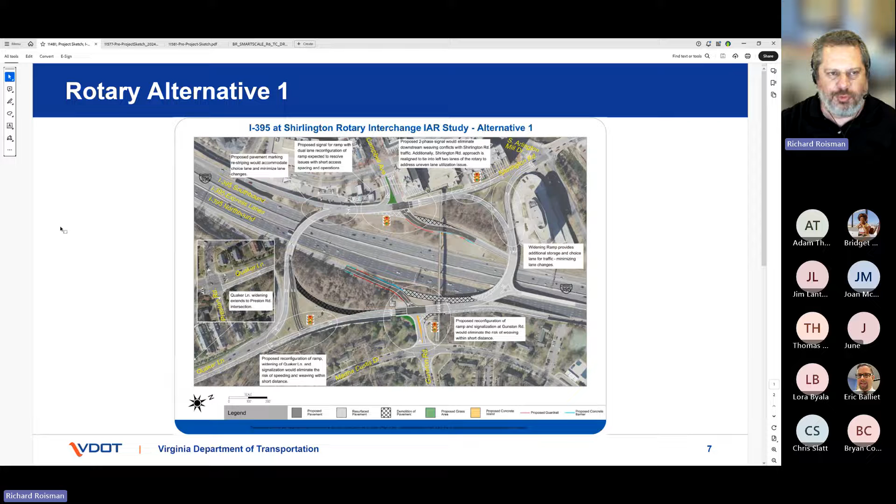Switch here, that should be the board report. This is 2 pages. This one covers the rotary itself, let me zoom a little bit so we can see the sketch. Everyone is able to see my screen, correct? Yes. Okay, so this is for the rotary itself, and then I have a second page that just covers the improvements to the merge for the southbound Glebe on-ramp into the CD lanes.

I'm going to focus on the county side since the city is handling its own piece. The main change is the change in this ramp coming off of the southbound 395 to provide a direct connection here to Campbell Street. This is a left and a through left with a new signal.

Staff has expressed some concerns to VDOT about their simulation modeling for this location as well as the next one downstream here at Campbell and South Quincy. So we are asking VDOT to allow us the flexibility, as further investigation is done, to consider putting a prohibition in there for the through movement.

The modeling shows some potential overloads of the ramp itself and queuing in high volume conditions, as well as problems with this intersection here, which is one of the 100% intersections of the Shirlington Center. However, there are significant safety improvements to taking people off of that horrible merge that comes into the rotary under existing conditions. So we still think it's an improvement, but it just needs to be watched carefully to make sure it's not overloaded.

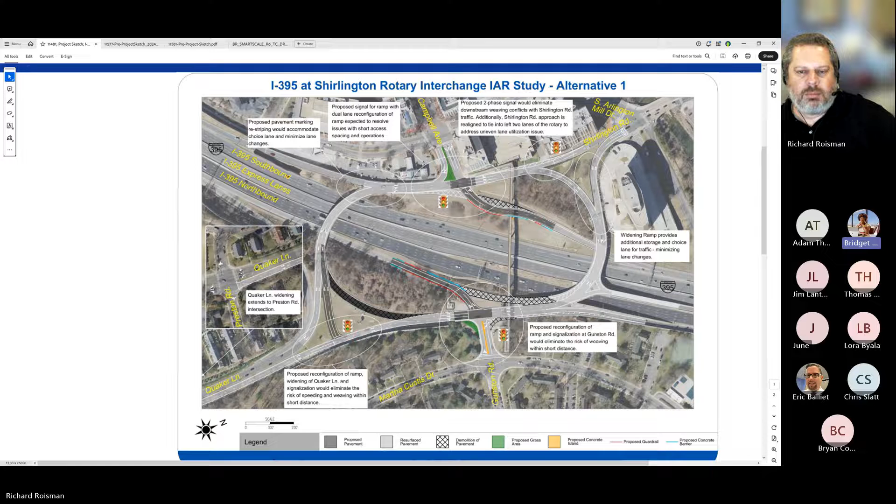All right, and then there's a little bit more to this, right? Yes, this is the improvement at South Glebe and the on-ramp from South Glebe here to the collector-distributor road. So what we're basically doing is a little bit of realignment to get more of a merge lane than exists currently—striping and a little bit of milling and paving to get an additional merge point and taper here to try to improve the operations of that.

Because again, this is a situation where under existing conditions, because of the poor merge, there's queuing here, as well as some high crash locations at this merge point.

You can see here that the CD lane is also accepting traffic from this ramp, which is from northbound South Glebe onto southbound 395. We had pushed VDOT to look at that, but they deemed it out of scope in the original study, as well as the study refresh.

Are we still seeing significant queues? This used to occur frequently from northbound 395 onto Glebe Road, this movement here. Has that improved over the last few years? It used to be very problematic, with potential for a crash between a stopped car and a mainline movement on the freeway. I'd have to confirm with our traffic operations people, but my sense is it may have improved slightly, though it's still a known hotspot.

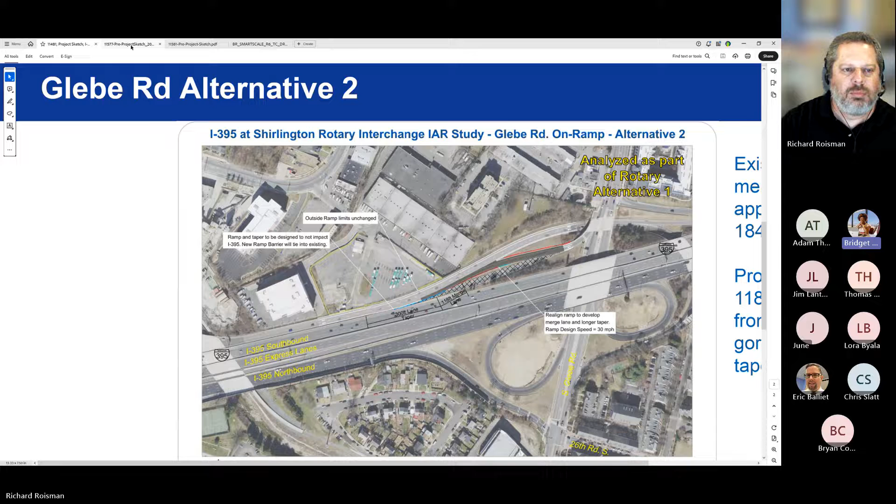When the pipeline study did its last public engagement, there was a lot of criticism lobbed at VDOT, I think appropriately, that it was very inadequate what was being proposed, that it would do very little to curb the speeding that Arlington's own speed studies show are problematic on Glebe, and that much of the improvements shown appear to be more capacity improvements than safety improvements—a lot of lengthening turn pockets and that sort of thing.

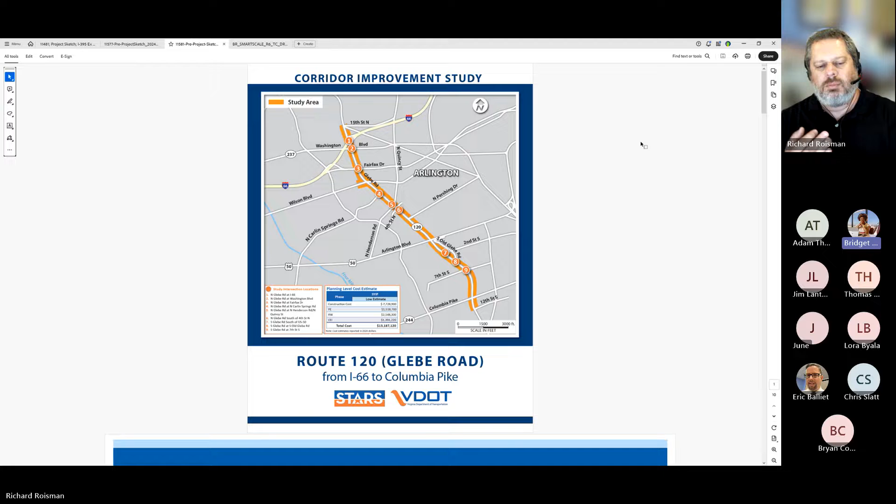Have there been changes since the last public engagement to this project? There have not been any substantive changes. Speed is obviously a safety issue, but the STARS framework is somewhat limited in terms of what we can do on a corridor of this length—this is almost a 2-mile corridor. I think had VDOT thought about it more carefully, they might have broken it into multiple discrete segments, which means we might have been waiting more years for some of the improvements that did come out in this study.

The county is making plans to do a full corridor look at Glebe at some point in the midterm, following the model done for the George Mason Drive study, which I think will allow a more holistic look than VDOT is simply allowed to do under STARS. That said, there are some safety improvements at some locations, including realignment of bus stops. In some cases, turn pockets are impacting the ability to cross some of these locations more easily, particularly at places like Glebe and Carlin Springs. But VDOT has done, I think, all that they're able to do under the STARS framework in what they and their consultant team have delivered for Smart Scale.

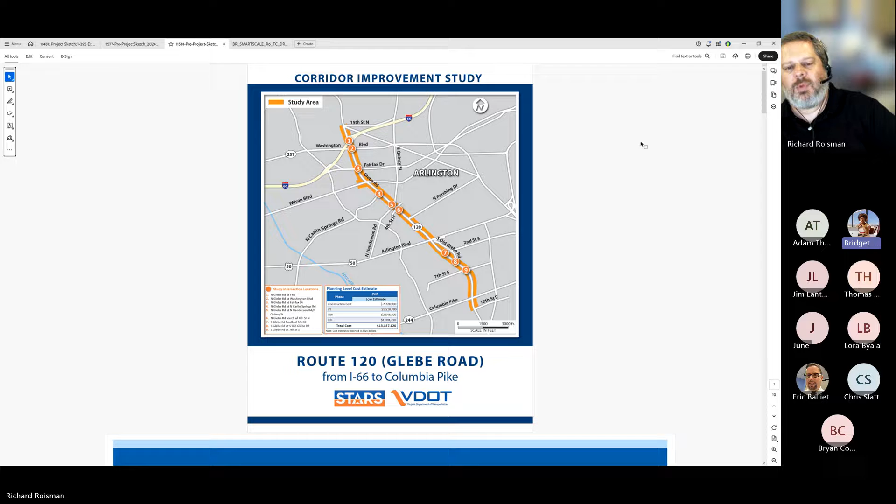Can you talk more about the historic preservation impacts mentioned in the board report? Sure, this is at 2 locations. This is the first one here at 66. This area, where the trail comes in, as well as this area here, have some level of historic designation, either district or individual properties. So it would be difficult to get the full width of sidewalk or multi-use trail we're proposing here without impacts and subsequent mitigation.

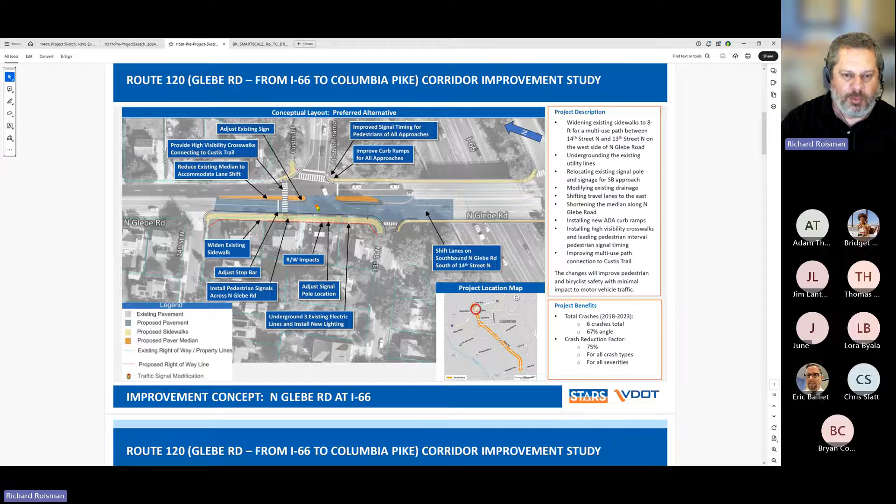Again, this is fairly high level analysis, not a full blown historic preservation analysis or 106 analysis—it's simply what's been done at this level of design. We've told VDOT to build in the additional cost and schedule of doing the full blown analysis into the Smart Scale application, because having this trail connection and this wider sidewalk for people coming off the trail is a significant improvement to existing conditions. But we want to know how much time and cost it would take, and what levels of mitigation are appropriate if we have to impact historic properties.

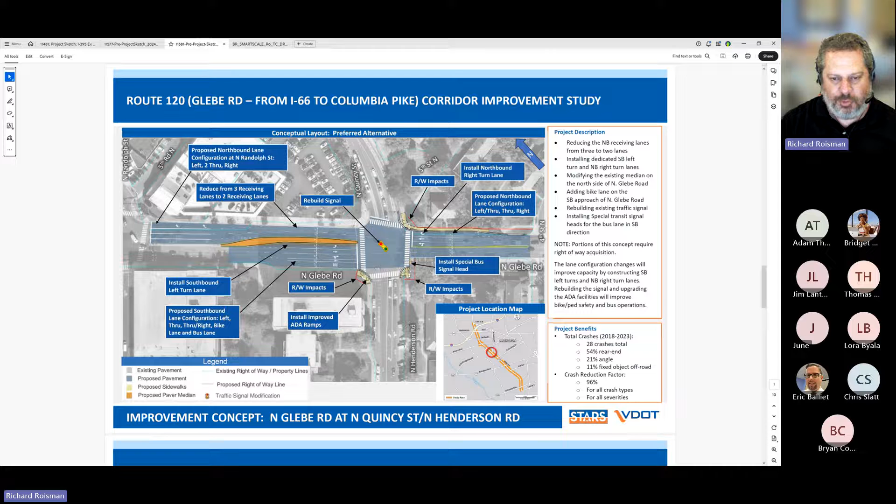The second location is at Glebe, Quincy and Henderson. This is the Buckingham Historic District over here, so it actually potentially impacts 2 sets of improvements: this one, getting the additional sidewalk within the Buckingham Historic District, and the next one down, where we're relocating bus shelters in this area as well as the new mid-block crossing. Again, it depends on what has to be done and what gets lost in terms of relocating the bus shelters, and what that impact might be within Buckingham.

Thank you. Any other commissioner questions or comments on the Glebe Road project? Look online.

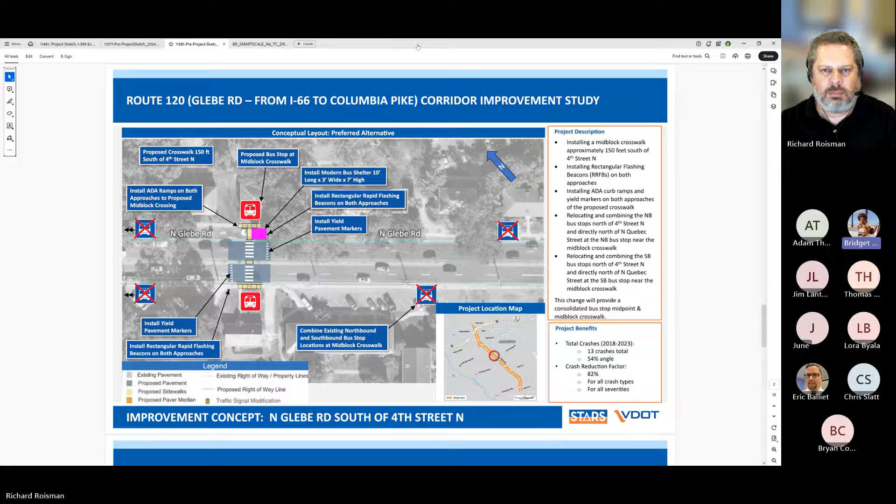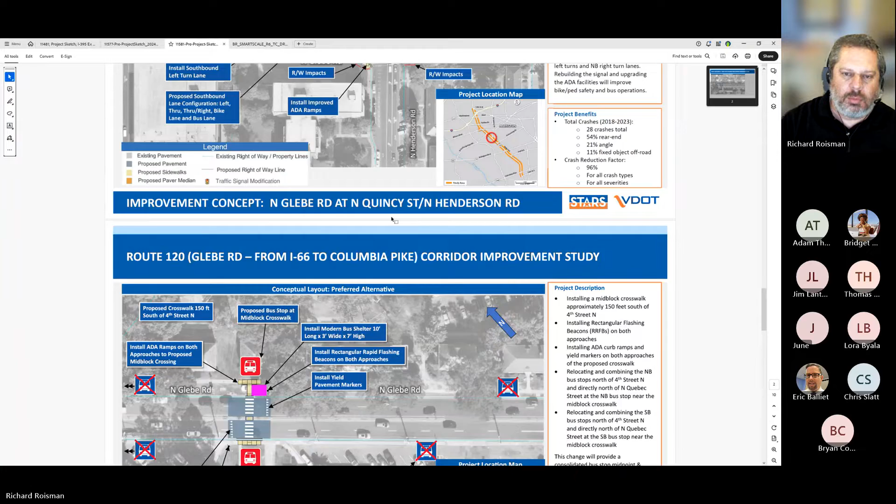So just to reiterate for my fellow commissioners, the folks turning left from the double left turn lane on Carlin Springs will never be given a green to do so while pedestrians are crossing at the same time. That conflicting movement crossing Glebe. Yes, that's what the protected phasing is for.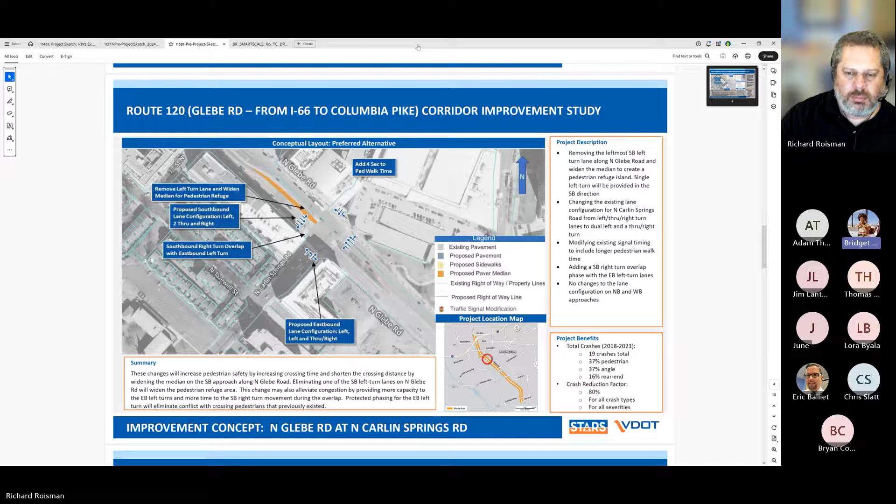All right, I will support these three in an effort to not let the perfect get in the way of the good. I have serious concerns about the STARS program in general because it does not seem to produce a particularly good safety outcome. I think we've been through three of them over the course of the last couple of years: Glebe, Arlington Boulevard, and I think I'm forgetting a third. I think there is some good in here from bringing sidewalks up to ADA standards and removing utility poles from the middle of the sidewalk, which is great.

But I don't think anybody who we have heard from over the course of the last 10 years beating the drum that Glebe Road is a dangerous place to be is going to be satisfied with the improvements in this project. So my concern that I'm going to choke down and not worry about is that this puts off any further improvements to Glebe, right? People are going to say, oh, let's wait and see how things improve from the Glebe STARS project. I really hope we don't do that, because Glebe sucks, and I don't think it's going to suck enough less after this project.

Commissioner Hussein? Yeah, I just had a maybe unrelated question. I'm not sure if it's related, but what is the value of changing the speed limit? Does that do anything?

This is a question for, I guess, everyone in the room. I'm just thinking about how we're reducing people's speeds on places like Glebe Road and Arlington Boulevard, where the speed limit's like 40, but you drive like it's 60 because it's like an open highway basically. I just don't know enough about that to know what impact that has, or what other impacts changing people's speeds can have.

I don't want to speak for our traffic safety and Vision Zero people, but I will say changing speed limits alone is not enough. I think our experience is that there also need to be changes to the physical condition of the roadway to provide visual cues and signals for people to actually slow down. So I think that's part of what the Chairman's slide is getting at for Glebe Road. Again, that type of improvement is simply not possible under the structure of the STARS framework.

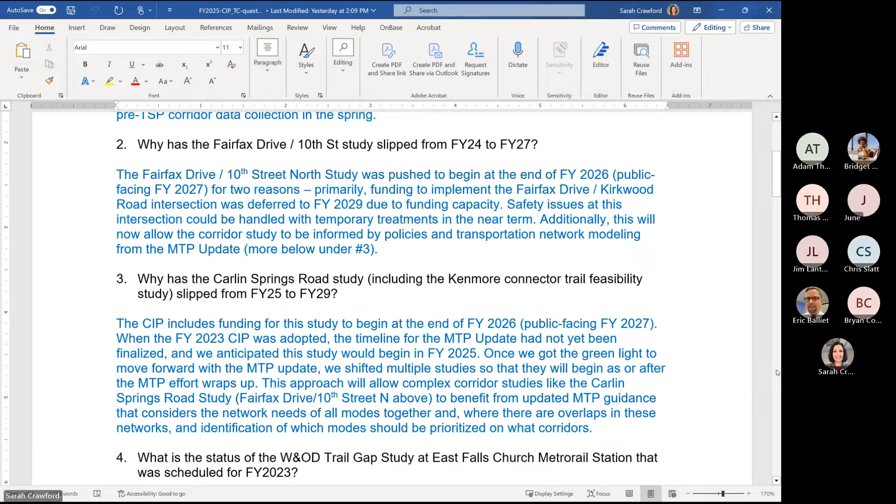Now we have a couple of study questions. We have put the W&OD trail gap on hold. This is disappointing, I'm imagining you're disappointed—we are disappointed as well. Based on our conversations with external stakeholders, it was not clear that the county should be leading this effort or the ensuing project, given the various rights of way engaged. At the point we got to in conversations, there was a perceived burden that would be put on county park property to advance anything other agencies would agree to. So we felt we needed to pause and get to a different place with some of our external stakeholders.

I have a question regarding the first question's response. The contractor the county has hired to monitor the deployment—is that data analytical monitoring or project management monitoring? Not being completely knowledgeable on that contract, but understanding their work, I'm guessing data monitoring and analyzing. But I can find out the specific answer.

I think that would be really helpful, because when we look at the scheduling for the implementation itself versus the analytics of how a pilot is doing, I'd be curious to see how the timeline's been affected. I don't have a full grasp of why the data analytical contract has slipped the implementation schedule. It hasn't. That was not the issue that caused the years of delay on this. It was just not the priority during the pandemic. But this contractor is proof that progress is being made—progress happens, yes.

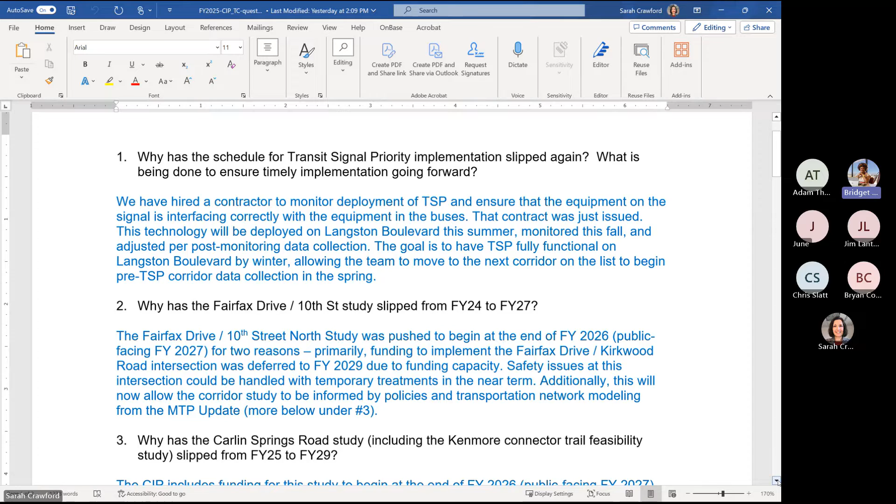We have begun internal work on the Four Mile Run trail crossing at Shirlington Road, and we anticipate engagement this fall. So more to come on that.

Also, another study that has been put on hold is the Iwo Jima Trail Connection Study. The main reason for that is the property owners involved do not have any plans on their books to advance anything at this time. It's challenging—I don't want to say force a project upon someone—but if they're not ready to bring it forward, we have other needs that we can address.

Our Meade Street Bridge project is essentially a piece of the core of Rosslyn implementation. It is consistent with the 2011 recommendations in a number of ways. There are some ways where it is not consistent.

While the Meade Street Bridge is not degrading to a state where it's unsafe, VDOT will likely replace it in the next, I'd say, dozen-ish years. And I don't think Public Art wanted to take that leap to install something permanent with the threat of it having to be removed at some point for reconstruction.

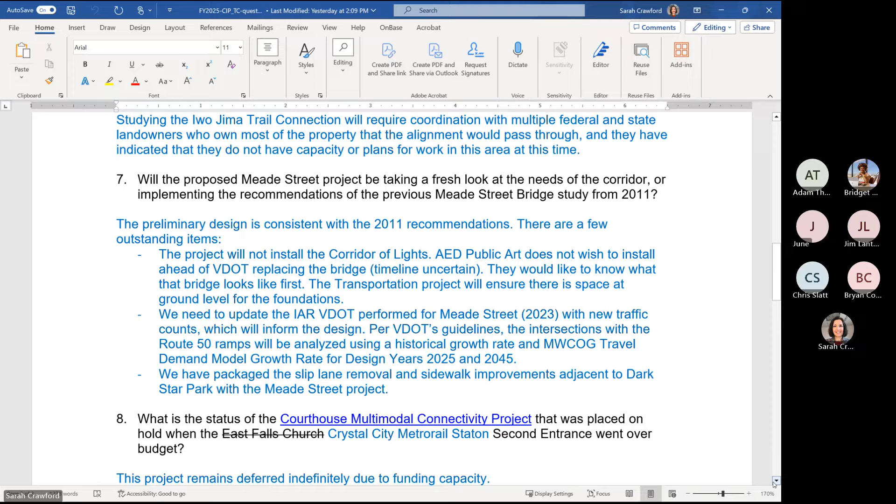Another thing is we've had to work with VDOT to update the interchange access report and do more modeling. So that's been something that may change some of the intersection configurations. And we've also packaged the slip lane removal at Dark Star Park with this project. So that's a change from what the project had previously anticipated.

The courthouse multimodal connectivity project remains deferred due to funding capacity. It's about a $6 to $7 million project and it didn't fit.

We do have, I'll kind of take these next two together, 9 and 10. We do have a number of projects in Crystal City and Pentagon City advancing, so many that we couldn't fit them all in the presentation for the board. But one thing we are excited about is extending the protected bike lanes and expanded streetscape south on Eads to 23rd Street. That's phase 3. The first 2 phases are under contract and moving forward in construction. That third phase extends the course of the project.

Under number 10, the first list of projects, which I won't read, were listed in the CIP document or the presentation. There are other projects within the workbook that we didn't highlight, mainly because they're farther out in the CIP and they're not active at this point.

So we do anticipate studying South Hayes Street to understand the opportunities there for better connectivity and safety. We do anticipate a project on 23rd Street, Restaurant Row, west of Eads. We have a placeholder in there for regional funding. We hope that some of the projects that might come out of some of the studies would be a good contender for regional funds. As I've mentioned a number of times here and with the board, we don't have local placeholder funds anymore in the CIP. We just don't have the capacity, so hopefully regional funding will be an opportunity.

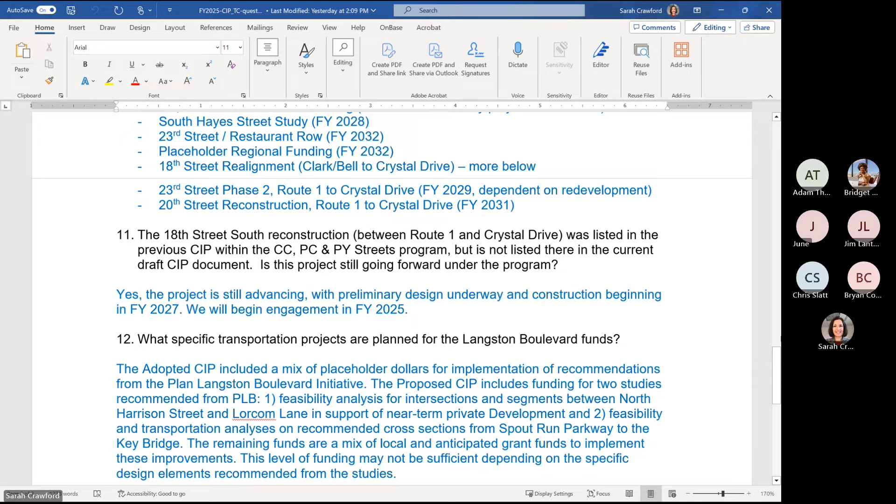For projects on Langston Boulevard, we don't have specific projects in the CIP. We've anticipated 2 studies, and you could say the study will bleed into the project, and that's true. We just don't have the funding identified specific to each particular project. We have the 2 studies, which together total about 1.5 to 1.6 million, and the remaining funds within that program would be used to fund the recommendations from those studies, the projects that drop out of them, with the full caveat we don't know exactly what those are and we don't know what they cost, but we feel pretty good about the funding we've populated.

And then the issue with VDOT, I'm thrilled to note that I was talking with my facilities colleagues and the fire station moved in on Tuesday, which is great. The fire department moved into the fire station on Tuesday. I love to try to blame everything on PROWAG these days, but I can't fully blame PROWAG for that.

I commend VDOT's vigilance on this new federal guidance. We're all going to be caught up in that. But what happened was the signal plan realigned crosswalks and we had to update the ramps anyway, and they wanted them further updated to the new PROWAG guidance. Luckily they allowed us to break that out into another phase, but it took some conversations.

Awesome, thank you so much. Can you talk about...

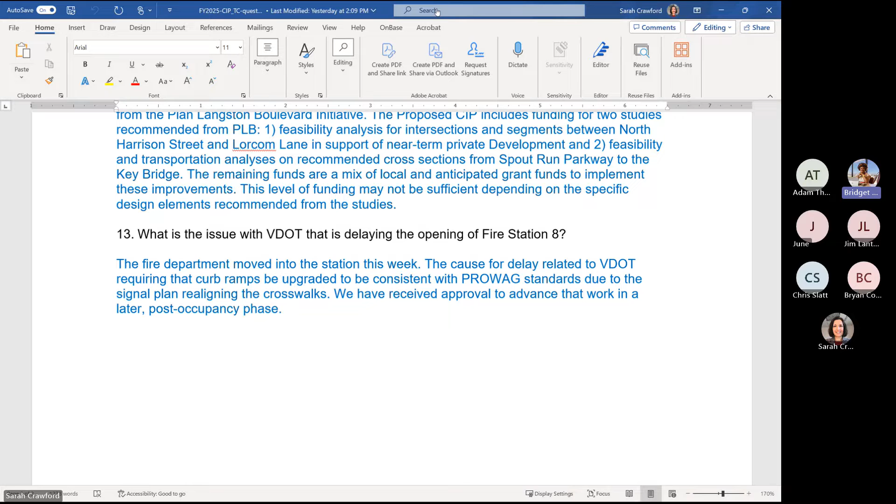So just looking at the CIP document, right? We show how much money is expected to be in the Transportation Capital Fund from year to year to year to year, and it has a separate line for reserve. And then it shows a balance every year, often at least $10 million. Can you help me understand how we square that with a $6 million project like Courthouse Multimodal not fitting into the CIP?

This is where I wish I had our transportation funds manager with us. We have both required—I don't think it's legislated by the state, it might be by NVTA—but we have internal practices of levels of balance we need to maintain. I don't know them off the top of my head, I apologize.

What we account for in the analyses we do year over year is where we land with that fund balance to ensure we're meeting our requirements. That's taken into account in the implementation adjustment analyses. We actually look to see if anyone will notice—I'm giving inside baseball here—we dip precariously low, particularly on C&I, in a couple years. It's down to 1 million. So I think...

The way the implementation adjustment layers on either before or after the fund balance line item—I should pull this up so I'm looking at it. I hear what you're saying, I think I hear what you're saying now. If it weren't for the implementation adjustment, we would probably hit zero, or about negative 35 million, definitely.